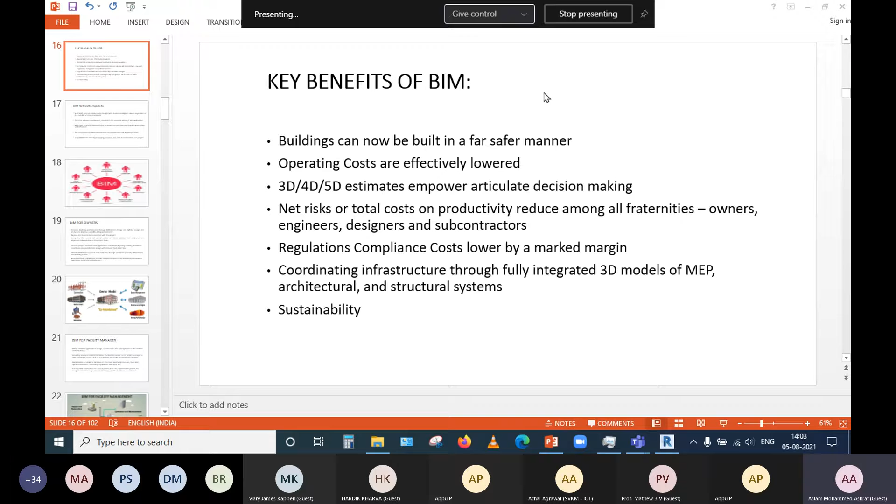So I'll be sharing my screen now. Can you see my screen? Yes, sir. Can you put it in slideshow mode, sir? Yeah, sure. Okay, I hope you can see my screen now.

So our today's topic will be digital construction. And let me introduce myself. I am Engineer Aslam Muhammad Ashraf. I'm a senior technical engineer from BIM Labs Engineering Services, Kochi. And I'm working in this digitization of the construction industry and building information modeling for the last 3 years. And I have project experience of around 7 years, mainly in MEP services, that is project execution and commissioning.

So before going to all these terms, there are a lot of terms here, we need to have an introduction into all these terms. So first of all, we will see why digital construction is relevant. What is digital construction? How can we define digital construction? So we all know that we are living in a world where digitization is having its role in every aspect of our life, like the mobile phones we are using, the computers, and every sector, even the education sector, data, information technology, and even in the financial sector, we are all using digital currencies, digital transactions, especially after this post-COVID scenario.

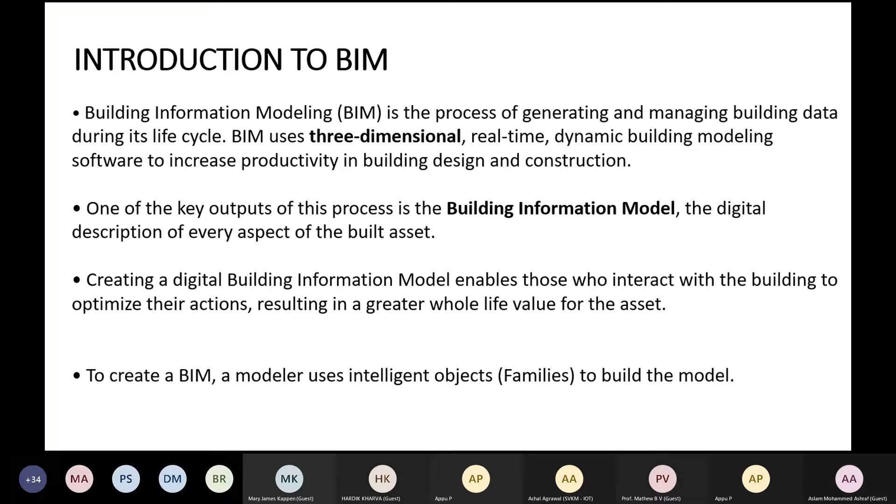The definition of building information modeling as part of ISO 19650, the primary standard defining BIM, is: use of a shared digital representation of a built asset to facilitate design, construction, and operation processes to form a reliable basis for decisions. That is, we are creating a virtual database of our building.

It will have its architectural part, structural part, mechanical, electrical, plumbing, infrastructure; whatever we are going to construct in reality, we will create it virtually using BIM authoring software like Revit, ArchiCAD, etc. Then we will add information. We will enrich the model with geometrical data, non-geometrical data, physical, thermal, heating and cooling loads, climate data, the project planning data; everything can be added as an input into this model.

The US National Building Information Model Standard Project Committee is another body responsible for the implementation of building information modeling in the United States. It defines BIM as a digital representation of physical and functional characteristics of the facility. It is not simply some geometry, not simply some drawing. It will have more than that. The physical and functional characteristics of the building will be added to the model.

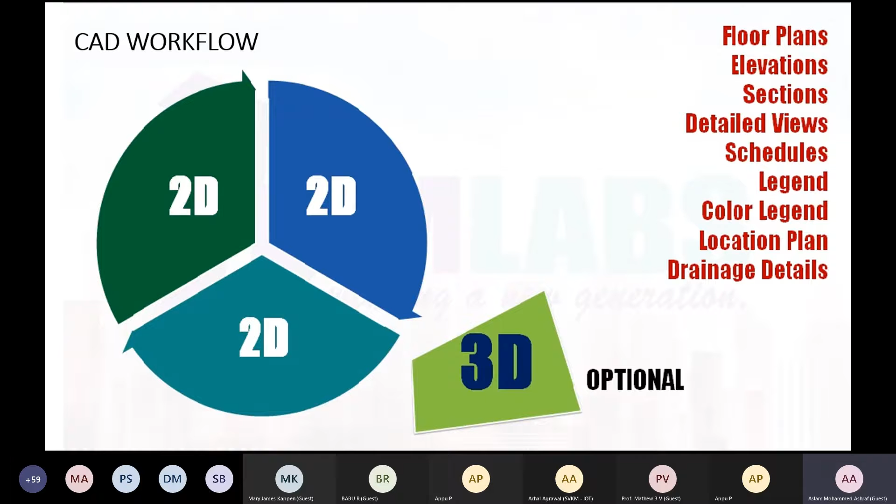But this has many advantages. The CAD-based workflow has many advantages when we compare it to the earlier hand-based drawing. It can save a lot of time because we are using computer-aided software like AutoCAD or ZWCAD or whatever 2D CAD software. But there are a lot of disadvantages caused by the traditional CAD-based workflow.

The first one can be said to be updations and rework, because a small correction in a CAD-based workflow needs a number of updations in different sheets. For example, if you want to change the position of a door or a window in the architectural plan, it should be reflected in the section, the elevation, and whichever views you have created. So every time the draftsman has to make the change in every drawing, and it will take a lot of time and manual work.

Another drawback is coordination and clashes. There is no proper coordination between different disciplines like architectural, structural, mechanical, HVAC, electrical, plumbing. All the contractors will create their own 2D CAD drawings, and when these drawings are brought to the site and they start their installation or construction works, clashes will arise. For example, an HVAC duct going through the same elevation as a structural column or beam, or electrical lighting fixtures allocated in the same place as an AC terminal.

And consider a high-rise building or a very huge project. There will be thousands of clashes, and if you try to clear these clashes on site, it will definitely cause time and cost overruns, and it will eventually result in the project going over budget and a loss. So actually we do not have any solution to find the clashes during the design phase. They can be found only during the execution phase.

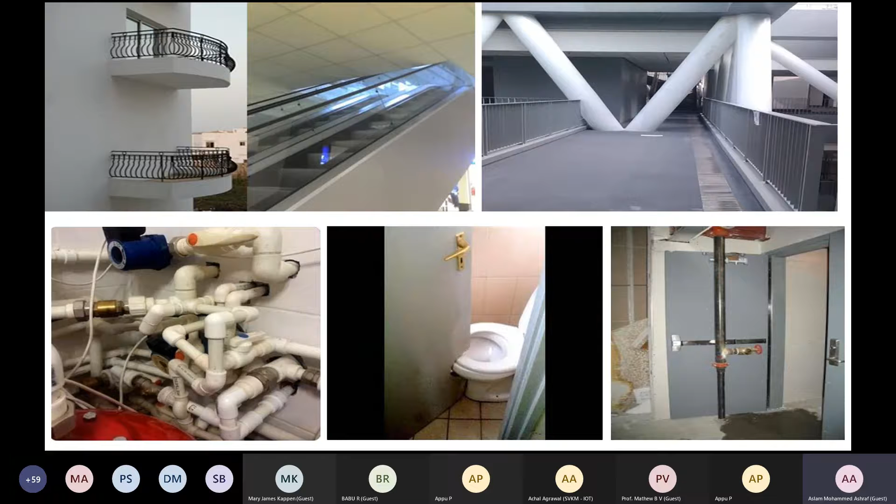So all these drawbacks of CAD prompt the engineering society or the designers to go for alternate methods to streamline the construction process. That's why building information modeling has been introduced. In order to compensate for all these drawbacks of CAD-based workflow, BIM has been introduced. So how can BIM help in reducing all these issues caused by the traditional CAD-based workflow?

The importance of BIM is that it can be extended from the very programming or starting of the project to the operation and maintenance as well as renovation phase of the building. It is not limited to the design phase, it is not limited to the analysis phase. It can be extended to each and every phase of the building construction, the engineering and construction; we can extend it to every phase of the project. Okay.

So there is automatic updation. That is the first benefit. We do not have to update the views separately. If you are making a change in a floor plan view, it will change in the 3D view, section view, elevation view simultaneously.

Then there's another benefit. It is called clash detection. We can find the clashes using dedicated clash detection software like Navisworks. We can create a BIM model, export it into clash detection software, and find if there is any element clashing with another element, like a mechanical element and a structural beam or a column, or some electrical and HVAC elements. If there is a clash, we can find it and clear it during the design phase itself, and we can hand over a zero error model to the site, so that the clashes can be avoided in execution of the project.

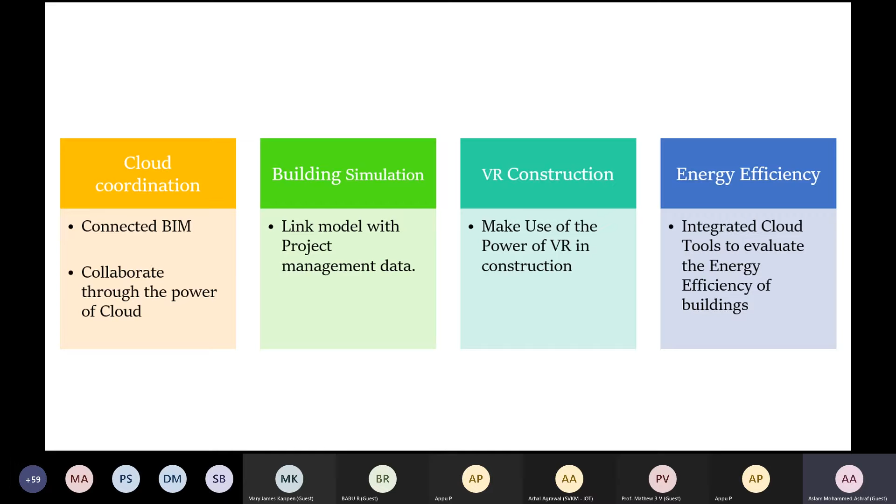So we have explained all these things. The construction can be done in a very safe manner because there is a streamlined process going on. Then operating costs can be effectively lowered because all the planning, all the construction will be virtually done before the real execution of the project. And when we hand over this data to the site, it will be very easy to carry out the process.

Then 3D, 4D, and 5D. That is 3D model, 4D means time, that is a schedule, and 5D is the estimation that can be created from the BIM model. It can be used for decision making. And we can have regulation compliance; the local or international code compliance can be carried out in a very low margin or a very low amount.

Also the sustainability, like the LEED certification, the energy efficiency can be calculated from the 3D model itself using software like Insight, and the sustainability studies can be done before the actual construction of the project itself.

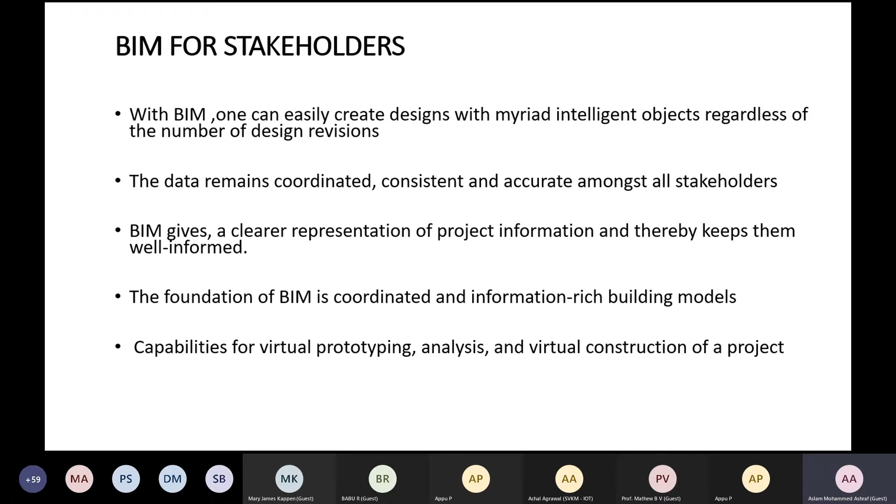So BIM is not just for the designer or the draftsman or the client. It is for the entire stakeholders of the project, that is from owner to the facility manager. Whether it be contractor, architect, structural engineer, mechanical engineer, fabricator, facility manager, or maintenance technician, the BIM model is useful for all of these stakeholders.

So for the case of owners, it can be used for reducing their financial risk associated with the project. It can be used for creating reliable cost estimates and improved collaboration of the project team. And it can be used to assure program compliance through ongoing analysis of the building model against owner and local code requirements. So the local code requirements, the energy efficiency, the BIM-based energy and lighting design, everything can help the owner to reduce the financial risk associated with the project.

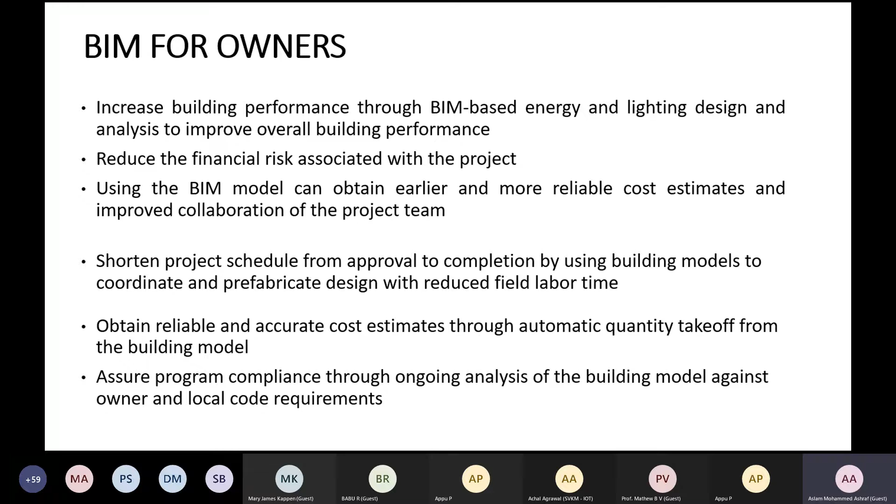Also, an owner model can be set as an as-maintained model or as an as-built model. It will be having the entire data related to the model, like space management, the fabrication details, maintenance management, energy performance. Everything will be there in the as-built or as-maintained owner model. So even after the handover of the project, it can be used for further renovation of the project, further approvals, their demolition. In every phase of the project, it can be used by the owner. And for the future space management, this model can be used.

Also for facility managers, this is a similar use, that is using the model for facility managing and maintenance planning, etc. So it can be used for knowing the details about the service period, manuals, replacement period of the equipment used in the building. For example, you have some furniture that is used in the building, and we will be having the BIM model showing all the procurement details of the furniture, the warranty period, the replacement date, everything will be there, and we can use this BIM model to know exactly the service report of the equipment used in the building, the renovation. The renovation budget, the renovation estimate, everything can be accessed from the model. So it is very useful for facility managers also,

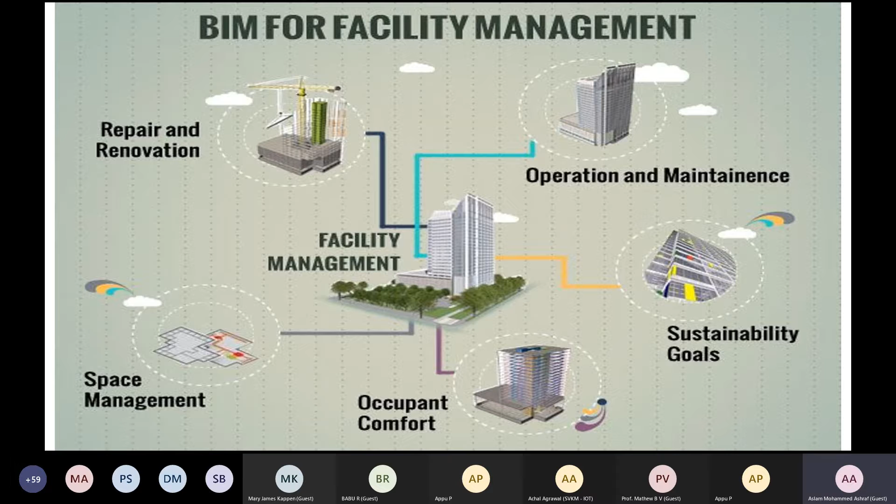and also for the future space management and then setting operation and maintenance. Another important thing is that we will be having the maintenance schedule. It can be uploaded into a BIM model. So the future maintenance can be planned using the BIM model itself. And we do not have to call many persons and confirm whether the maintenance has to be done, what was the previous work done. It can be extracted from the BIM model itself. So it is very useful for facility managers.

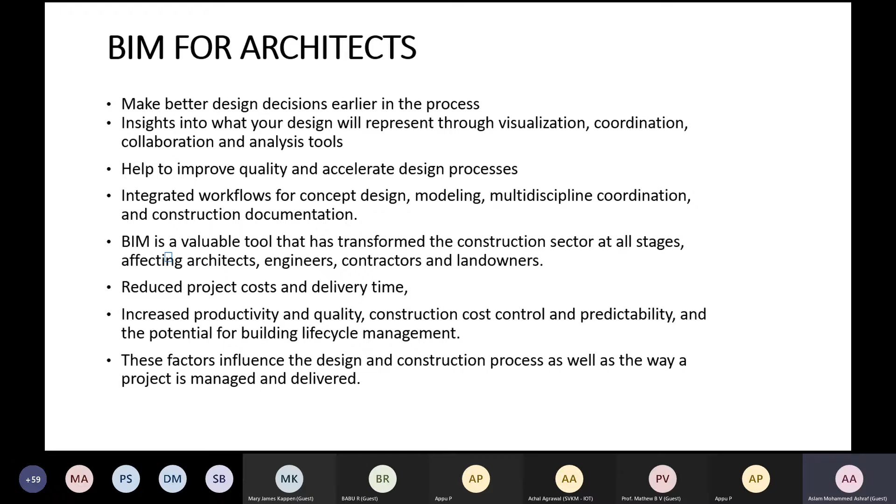Also for government institutions, it is very useful because they can streamline the process, and because of the collaborative nature of building information modeling, it is very useful for government institutions also. They can check whether the model is complying with the local codes, whether the required code requirements are done or not. Everything can be done. Also visualization can be done. And for all the stakeholders like architects, engineers, this can be very useful. There are many points to discuss regarding the usage for architects, structural engineers, mechanical engineers.

So in short, we can say that the entire cost of the construction project, the clashes, can be reduced. Then reworks can be reduced. The turnaround time can be reduced. We can have better accuracy in estimating the cost. So most of the issues can be resolved during the design stage itself. That is the main benefit of a BIM model.

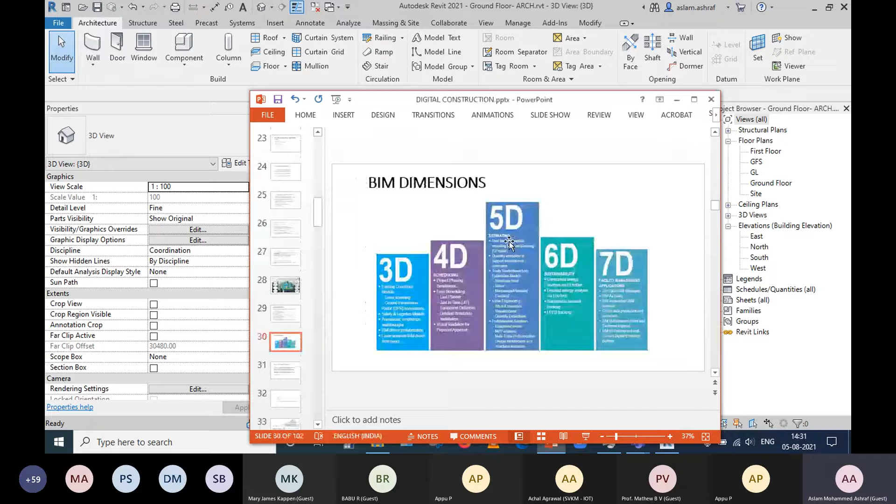So we will see some software interface, then we will go deep into this. Otherwise, it will be difficult to understand what is going on. So what are the different workflows related to BIM? That is another important topic.

So how can we execute BIM, or building information modeling? We need some BIM tools, different softwares like Revit, then FormIt 360, then structural analysis softwares like STAAD and ETABS, then MS Project, Primavera and Navisworks. So we can use all these softwares to create a proper BIM execution plan.

We need to know that BIM, or building information modeling, is not simply a software. It is a process that will be carried out during the entire phase of the building construction, and it is not restricted to a single software like Revit or ArchiCAD. It will start from conceptual design softwares like FormIt or SketchUp, and it can be extended to Revit for detailed design, and we can use the model created in Revit for analysis in platforms like Autodesk Insight, then structural analysis softwares like STAAD and ETABS.

Then we can take the project planning data, the project management data we have created using Primavera or MS Project, and bring it into softwares like Navisworks to create a 4D simulation by linking with the BIM model. Then finally, we can create documents like sections, 3Ds and elevations from BIM authoring softwares like Revit itself. And there are softwares like BIM 360 used for cloud-based collaboration. So we will see the interface of some softwares like Revit and Navisworks and how they can be used to create a BIM model. Then you will have more insight into these workflows.

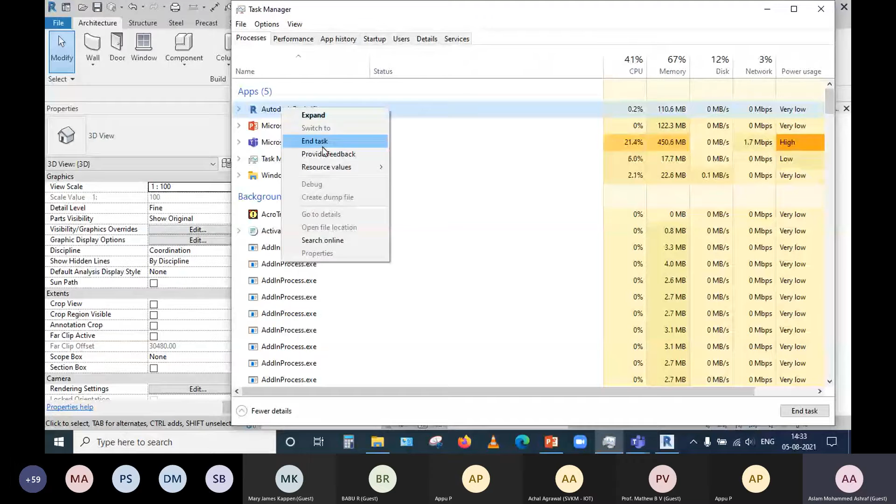So the importance of Revit is that Revit is a BIM authoring tool. We need BIM authoring tools to create a BIM model. Then we need analysis softwares like STAAD, ETABS, then Autodesk Insight for energy analysis, structural analysis, etc. Then we need project management softwares like Primavera or MS Project to create the project management data, and we can link it with the BIM model using softwares like Navisworks. Then for clash detection between different disciplines, we can use the same software, Navisworks. And finally, we can use BIM 360 for project coordination and collaboration using cloud.

Okay, so Revit is a BIM authoring tool, and we can create new projects using Revit. For example, I will show you some models I have created. The importance is that we are not using lines or arcs to create the model. We are using real elements, virtual elements. For example, if you want to draw a wall, there is a tool called wall itself. If you want to place a door, you can use the door family. Everything in Revit is called a family: window, door, roof, mechanical elements, electrical fixtures, lighting fixtures. Everything can be said as a family.

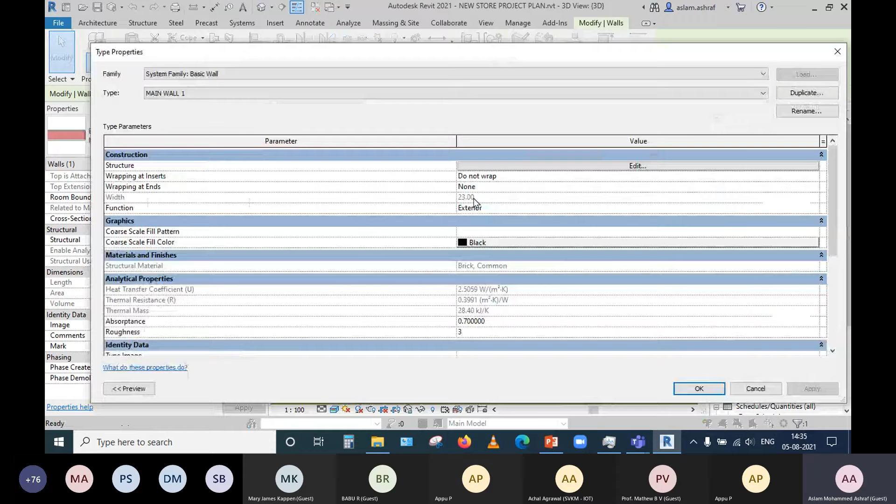For example, you can see the elements drawn in this model. If you select any of these, you can see the properties. It is called wall itself, and you can see the base of the wall, from which level up to which level. Then the height of the wall, the total area, the total volume, everything is added as parameters. That is why it is called building information modeling. It is not simply the model, it is more than that. There is a lot of information. For example, if you go to an option like edit type here, you will see the structure of this wall. You can have a preview.

And it will show the different layers of the wall. For example, the center is a 20 centimeter brick, and the plastering can be added as concrete plastering on both sides with the thickness mentioned. And if you go deep into the material, you will have the thermal properties, the R values, U values, everything of the material, and it can be used for energy analysis studies.

For example, if you want to know the thermal properties of the brick, they are added here, like the thermal conductivity, specific heat, density, emissivity, permeability. So you can use materials with better U and R values for energy efficient building construction. So that is one advantage. And you can even change the material. For example, if you want to change it into a concrete retaining wall, you can simply change the material here to concrete.

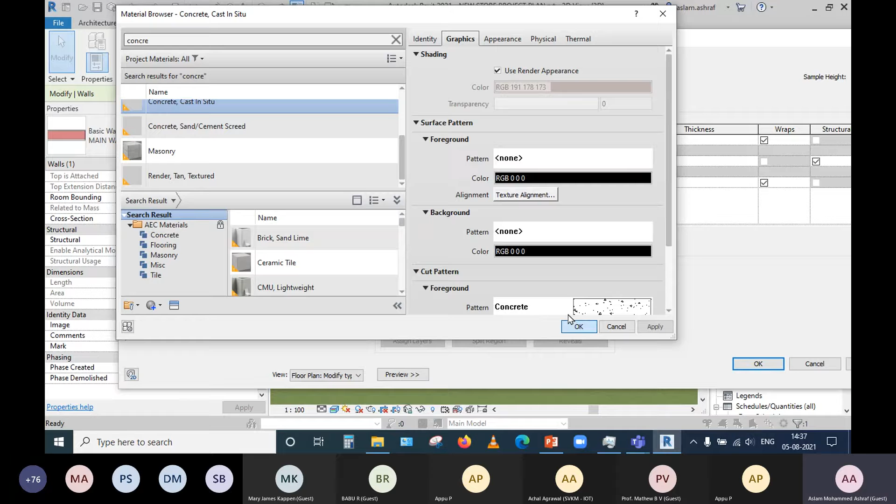So it has a dedicated library, the Autodesk material library, and it has a lot of materials that we are normally using in our projects. So if you are changing the material, the texture, everything will be replaced. So the material appearance, everything will be changed according to that. Even you can add paints, you can remove the paints from this. So the material texture will be seen in a rendered manner.

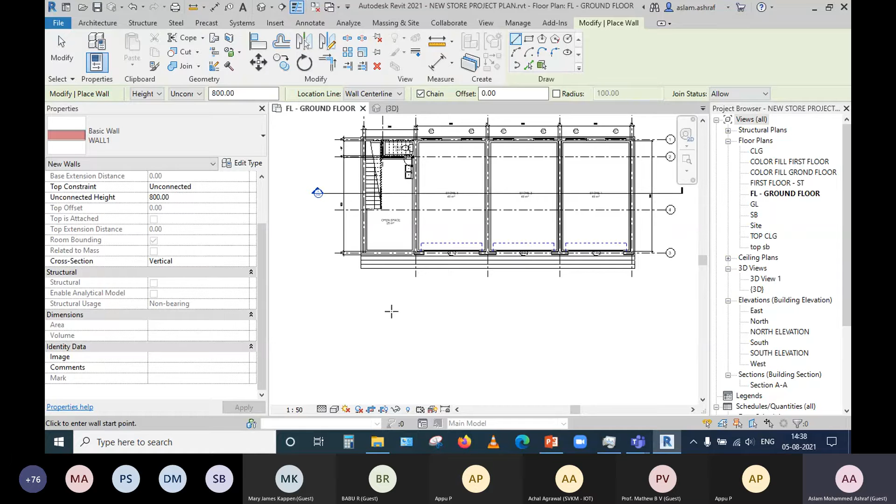So in order to draw some element, you do not have to draw some kind of lines. If you want to draw a wall, you can simply use a wall tool and simply draw the element. And that wall will be drawn. And the main benefit is that that change will be reflected in every view.

For example, if you are making a change in this floor plan, a top view or floor plan view, and you delete some element from here, for example these steps, I'm going to delete this, and that change will be simultaneously reflected in the 3D view. And if you go to the elevation views, that change will be reflected. For example, I'm going to delete the roof or a wall from this elevation view. That change will be reflected in the 3D, even in 2D view. So reworks and updations are not required, like in AutoCAD.

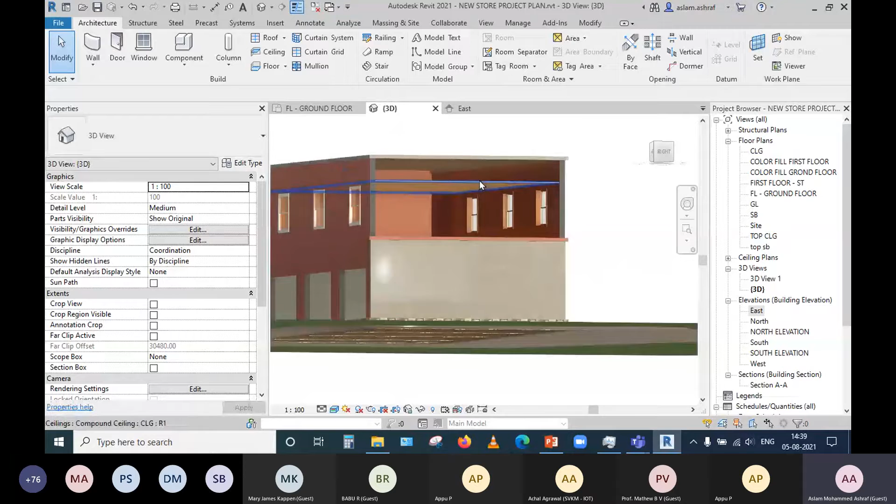And everything is an intelligent object, called a family. You can select the window or door or whatever, and it will be shown as that exact equipment itself. It's called a window, and the material used, the thickness, the width, the height, everything will be added as parameters. Even the frame material, the trim material, panel material, everything is listed, and when you replace it here, that change will be added into the model also. And you can create your own custom equipment, custom windows, custom doors, furniture, etc.

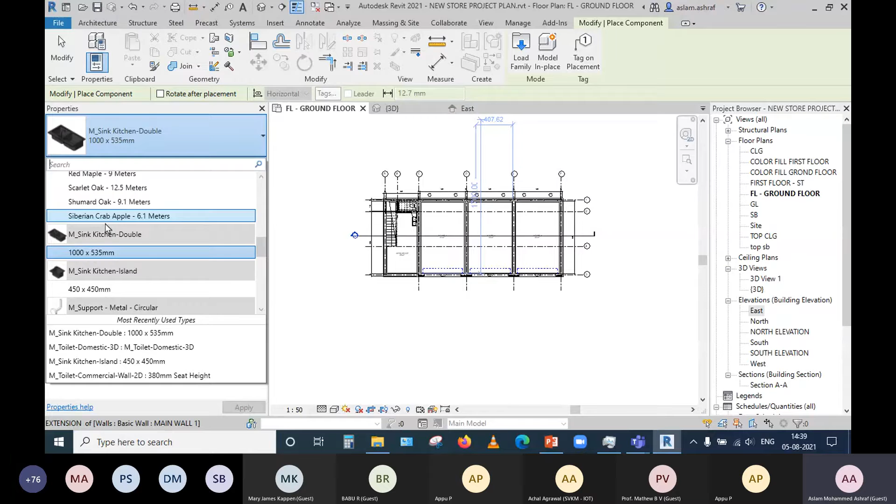And you can load a lot of elements from this interface itself, like furniture, kitchen equipment. So whatever elements we are using in a normal project can be virtually added from the libraries. And if that is not available, you can create it using your own family creation tools in Revit itself. You can see here the library lists almost everything.

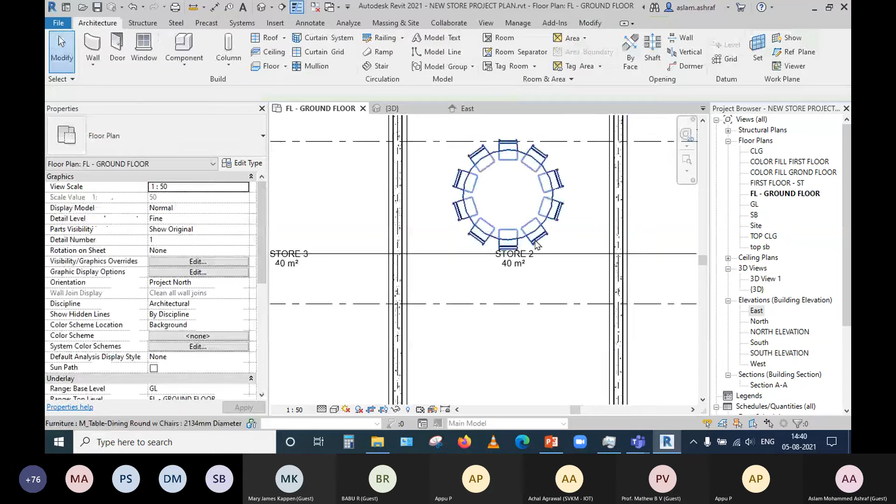So I'm adding one furniture here. And you can see that this is a separate family, and even the number of chairs can be changed. And that change will be reflected in every view. You can see the changes there in every view. So you need not draw all the sections and elevations separately. You simply place the element, and that change will be reflected everywhere.

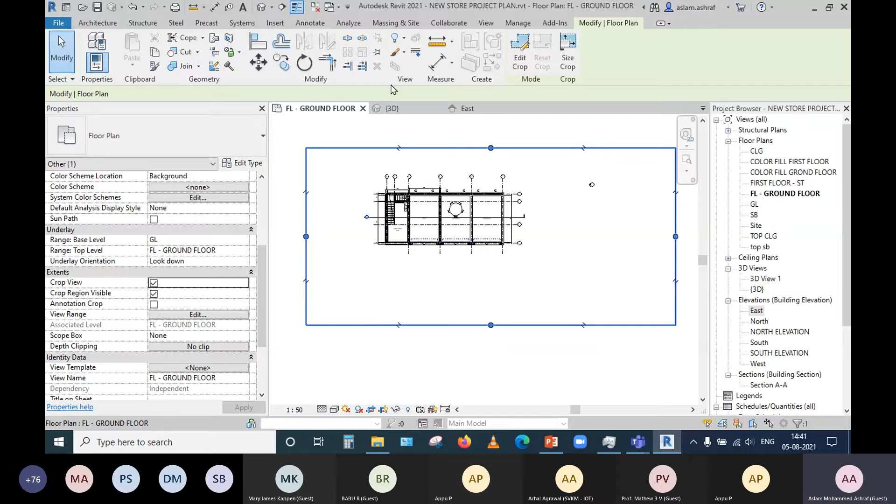So similarly, you can place the landscaping elements, the structural columns, beams, everything using these Revit tools. Like if you want to place some site components like trees, you can load it from here. And that change will be reflected in every view, even in sections and elevations. So the need for rework is completely avoided if you are using BIM based workflows.

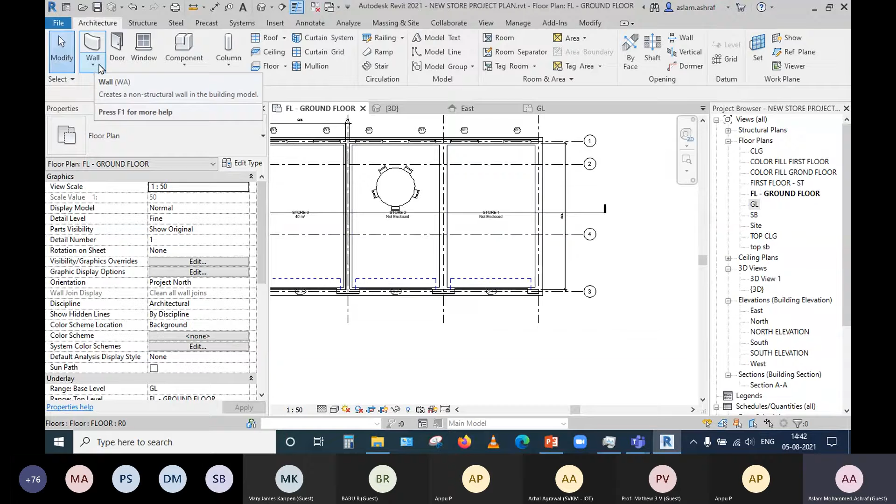And another important function is that we can create our own custom elements. Like we showed with the wall, we can even create doors, windows, columns, roofs, etc. according to our requirement. You can create sloped roofs, curved roofs, everything using these elements itself.

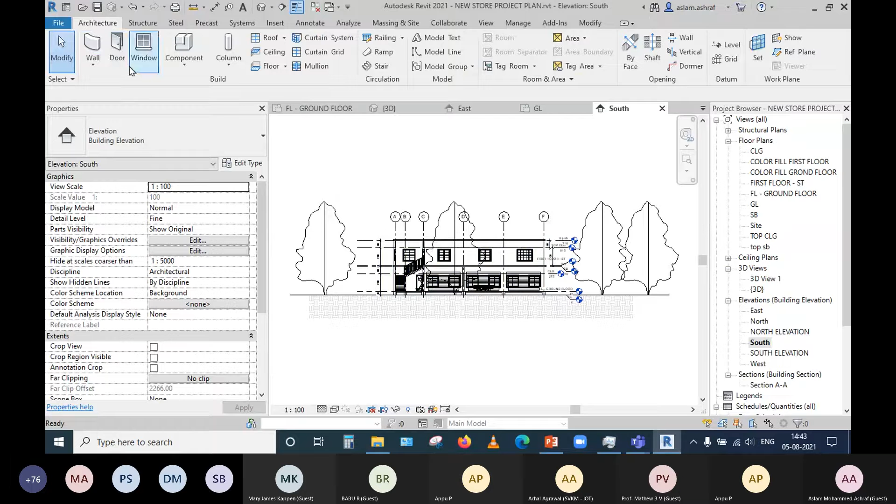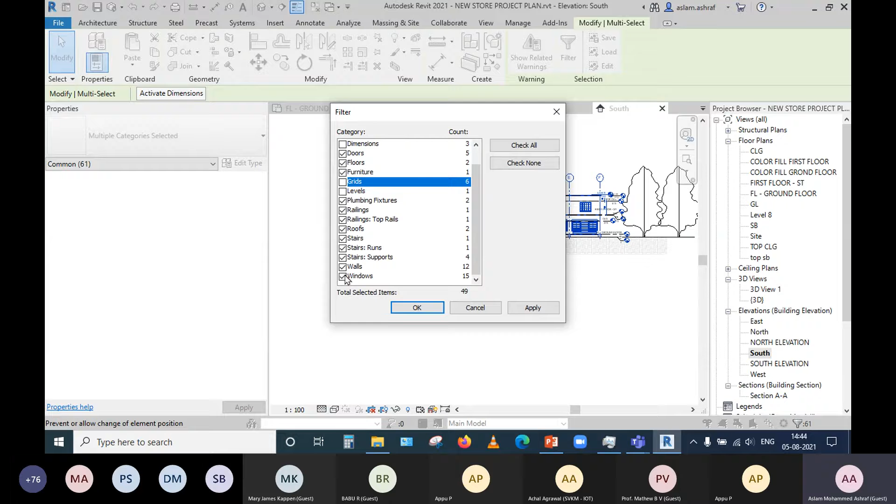And it is very easy to copy elements for creating multi-stories. For example, if you want to repeat these elements through multiple levels, it is a very easy job, unlike in CAD. You can simply copy the elements and paste them into other levels. Or you can simply copy, I'll show you.

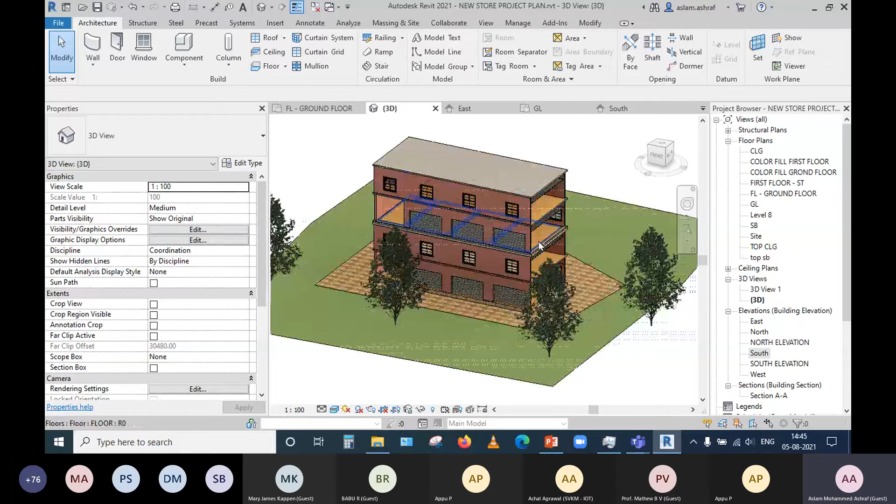So it can be copied directly to different levels, and you can create a multi-story building. Typical levels can be created very easily. So it will not take much time, and its 2D views, its sections, elevations will be readily created. So these are some functions of Revit.

And another important thing is automated estimation. That is, 5D estimation can be created automatically from the model itself. For example, if you want to create an estimate of all the equipment used in this building, normally you will be counting using some kind of Excel sheets, or manually from the CAD file, etc. It will be a very time consuming process, and it will be prone to human error also. So that can be avoided using automated estimation workflows in Revit.

For example, if you want to create an estimate of all the elements, all the doors used in this building, you can simply go to a tool called schedules and quantities. And here you can set which element you want to have the estimate. If it is door, you can set it as door, then click, then set the name of the door, the

manufacturer details. These are all parameters available for the door, like family, then the manufacturer details, then which level it is placed, then the model number, if it is available, it will be shown, then even the thermal properties, then width, height, everything can be listed. Finally, the count, even the cost.

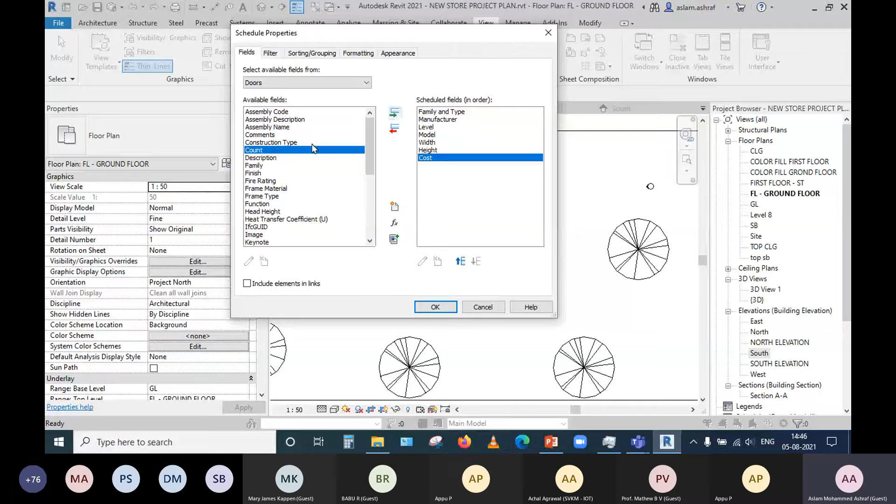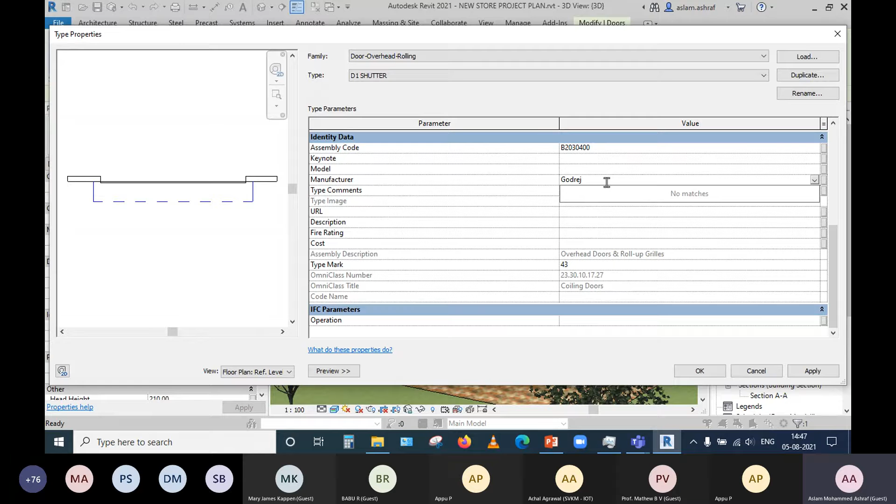You can see the manufacturer details here, like for example, Godrej or something related to it. And that change will be readily affected in the schedule, in all the instances where we are using the same, that will be reflected. Similarly, if you want to know the total cost, you can set the cost for each equipment and the total cost can be found out.

You can sort by different parameters like manufacturer, etc. Okay, and if you know the rate of one of the elements, you can have the total. So you do not have to count manually. You just have to show which category you want to have the estimate, that will be listed here.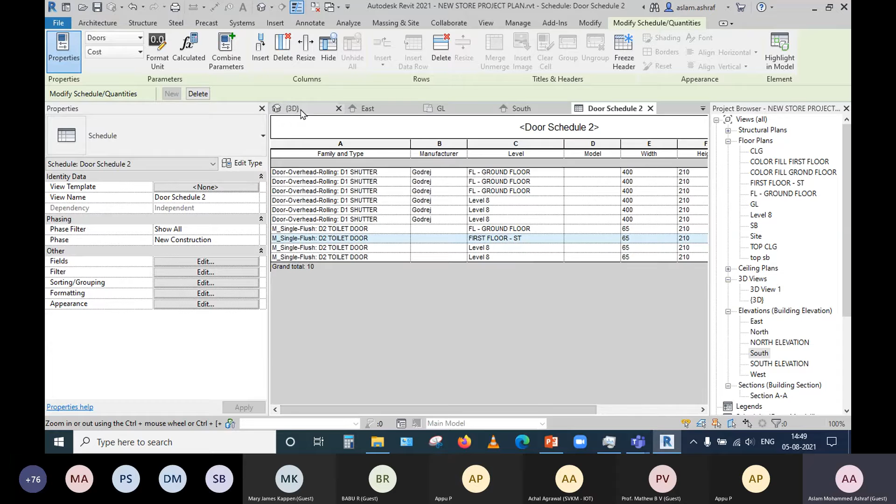And it can be easily exported to Excel sheet also, using export options and all. Can be easily exported to Excel format. Similarly, you can have the details of the materials used, like cement, sand, the concrete, everything can be estimated from the model itself.

For example, if you want to have the total estimate of the material, the wall material details, you can have it like this. It is all created automatically. The material description, material area, volume, number of bricks can be calculated using equations. You just have to provide the value of the volume of a single brick or 1 cubic meter of the material. That will give you the total amount required for the specified material.

So it can be created in a matter of minutes. But if you are going to calculate this from an AutoCAD file, we need to measure the length, the width, everything, and we need to find out everything manually. But in the case of Revit, it can be carried out by using automated estimation. So that is a very huge advantage for those who are doing estimations. So this is another benefit of building information modeling.

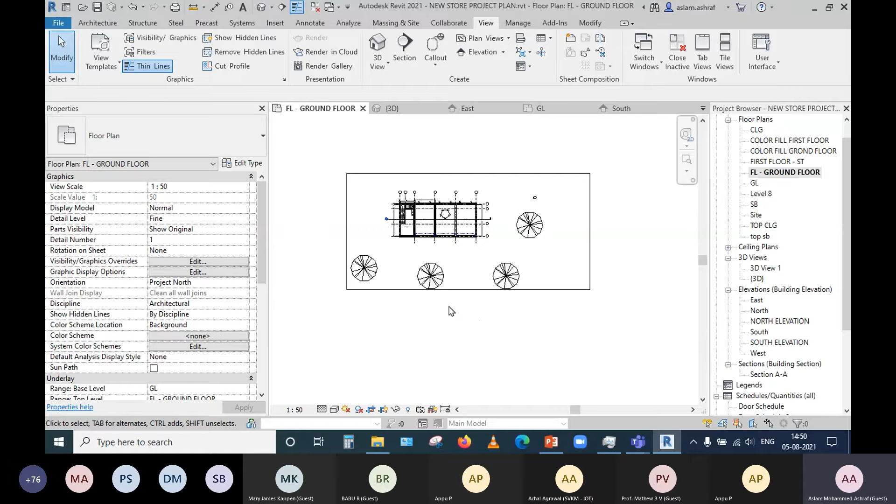And you can create different visualizations like rendering, etc. It needs some high configuration computers. Otherwise, it will take a lot of time to create useful renderings of the buildings. Otherwise, you can use cloud-based rendering platforms like Autodesk Render in Cloud. Similarly, you can create structural models. For example, you can have the structural model of the same building. I'll show you.

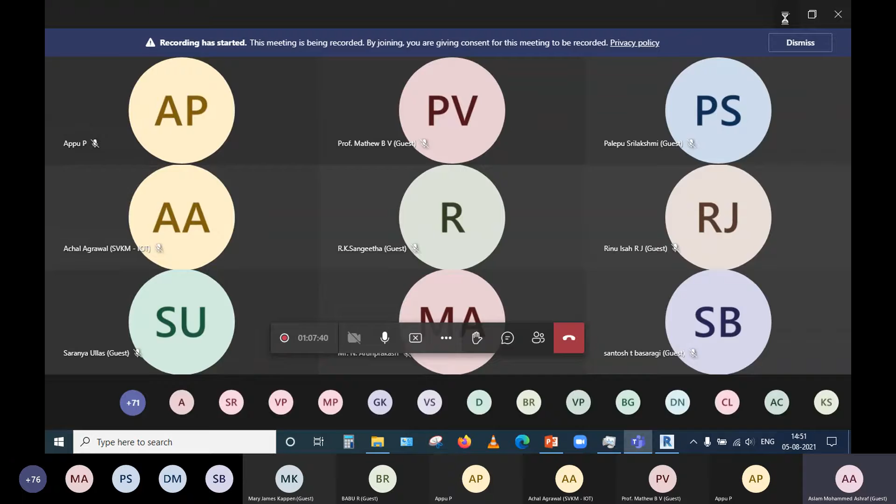So you can create the structural model similarly using Revit tools like column, beam, then the foundation, structural foundations, piles, everything can be created using the structural tools here. Even the rebar details can be added. And the best thing is that you can link together all of these models, the structural, the architectural, etc.

So if you want to draw a column, it is a very simple process. You can go to the corresponding plan view. You can select the type of column you want to draw. Then you can set the height up to which level it has to be drawn. And simply place it here. And you can see that that specific column will be added.

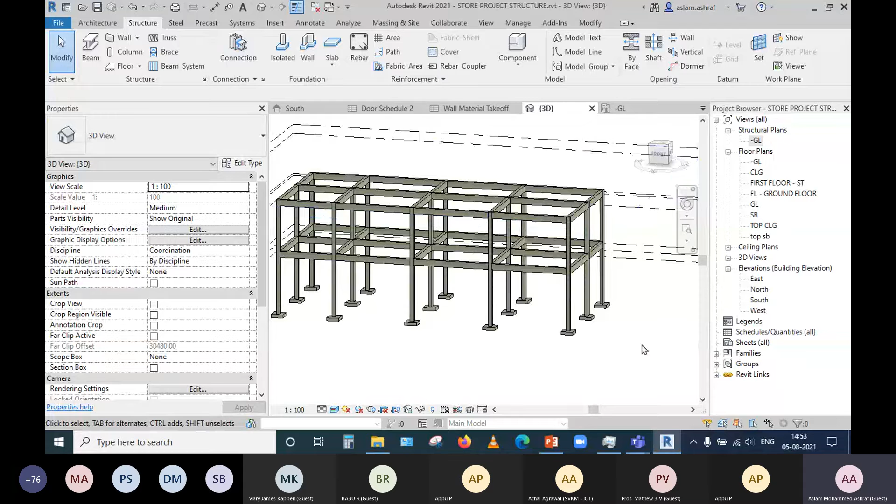You just have to choose the tool, set the upper and lower limits, and place it, and it will be drawn. And you can connect the beams similarly. Similarly, isolated footings, the rebars can be added. Everything related to structural elements can be placed using these tools and the process is similar, and you can have the estimate of all these things also. You can create the estimates of columns and beams based on the volumes, and you can create them from the schedules option.

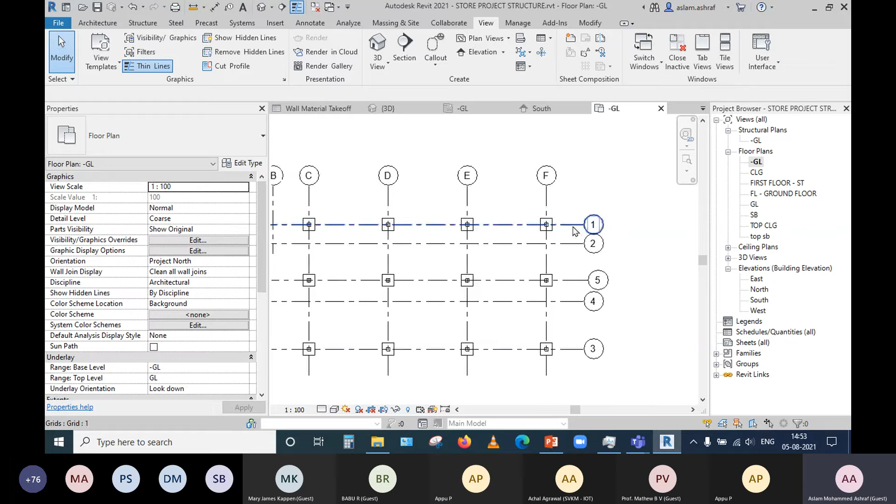And whenever you are making a change, that will be reflected in every view. So you can have the elevations, the top views, even the plan views, drawn from a single 3D model itself. And you can export this to AutoCAD or PDF or whatever format you want to present it to your site. That is also possible. You can export it into different formats.

Even to CAD format, it can be exported, and you can print in any paper size like A1 to A0 to A4. In any paper size, you can print it. That is also possible. Similar is the case with MEP models like HVAC, electrical, plumbing, and all.

So this is the MEP model for the same file you are using, the same architecture file. Similarly, you can create electrical documents of the same project, and you can club them together to form a coordinated model. And that is done normally using the software called Navisworks for coordination and for clash detection and all. And you can find the clash if there is any clash between different elements.

That is another important as well as interesting workflow to bring together all these files, that is architectural, structural, mechanical, electrical, plumbing, and check the clashes between different elements and create the 4D simulations and all. So I'll show you that workflow also. So for that purpose, we'll be using a software called Navisworks Manage, and I'll be using the 2021 version.

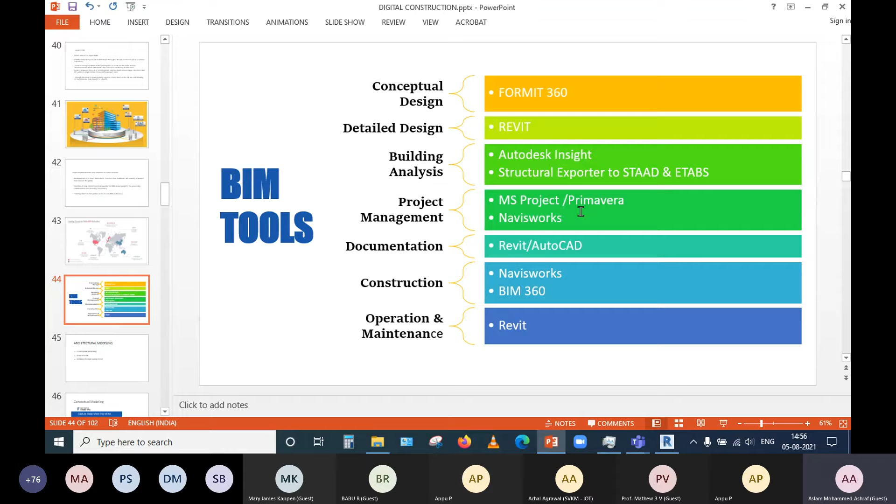So it can be used for clash detection purposes as well as 4D simulation, that is bringing together the 3D model and the project management data. So you can create 4D simulations of how the project will be proceeding. You can visualize the progress of the project.

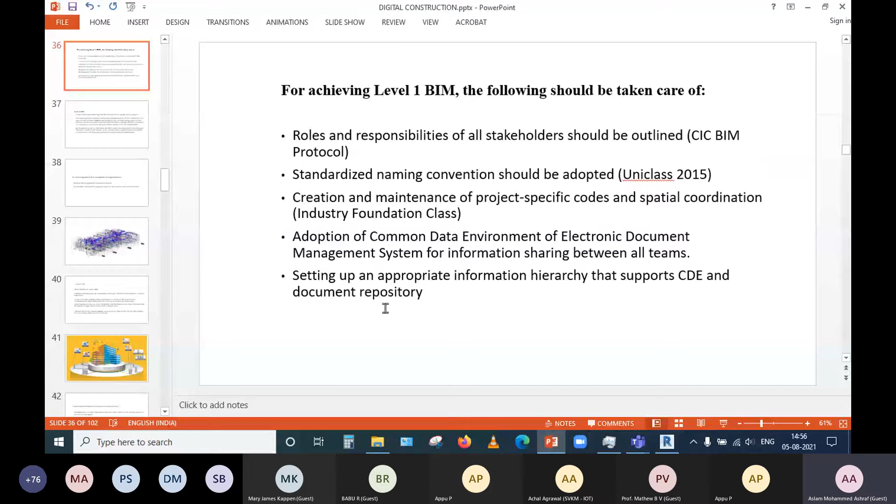So meanwhile, I will show you some more details about BIM. BIM is not limited to 3D modeling and 4D estimation. There are different dimensions in building information modeling, starting from 3D, and it is now extended up to 7D. 3D is simply creating a 3D representation of the building using software like Revit, and it will have its geometrical as well as non-geometrical data like volume, area, etc.

And then the next one is scheduling. That is called 4D BIM, scheduling of the project, getting the time factor into the 3D model. We can use any project management software to create the schedule, and we can bring the project management data and 3D model together using software like Navisworks. Then 5D, we have seen how to get the estimation from the BIM model itself, and we can have the estimate for each and every component that we are using in the project.

Another dimension is called 6D or the sixth dimension, that is sustainability. We can have energy analysis, how much energy will be used by the building annually if you build using the materials provided in the BIM model. And we can check whether it is satisfying the LEED certification conditions and all. If it is not satisfying, we can replace the materials with better energy efficiency values, run the report again, and energy optimize the building in order to contribute to a carbon neutral environment.

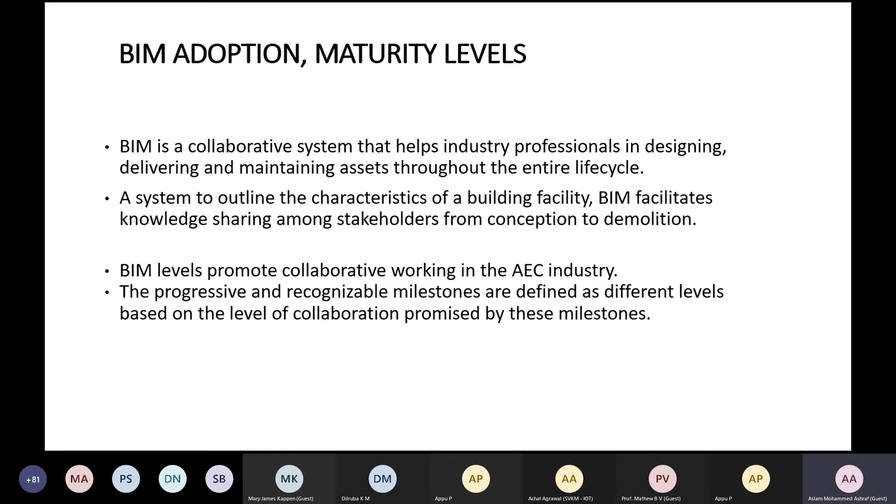So it starts from level 0 and it extends up to level 3 BIM. So what is level 0 and what is level 3? That is also important. Actually, level 0 can be said to be the initial 2D CAD based documentation, the normal CAD based workflow. It is called level 0 BIM. We will be providing PDFs and drawings based on AutoCAD drawings and all.

It is an obsolete level that is rarely used by industry professionals in developed countries, but in our country and most developing countries, it is the most widely used even now. That is why we need more digitization in our industry. We are all familiar with these kinds of 2D representation by drafting or by software like AutoCAD.

And level 1 will be the combination of 3D CAD and 2D drafting. We will be using some kind of 3D for representation, like 3ds Max or SketchUp for rendering purposes, for client presentation and all.

And there will be a common data environment that is managed by the contractor. It will be electronically stored in a computer or a server, and it will be shared only between the contractor and the client, and a little bit to some other stakeholders. And the level of collaboration between different stakeholders is very less when we are implementing level 1.

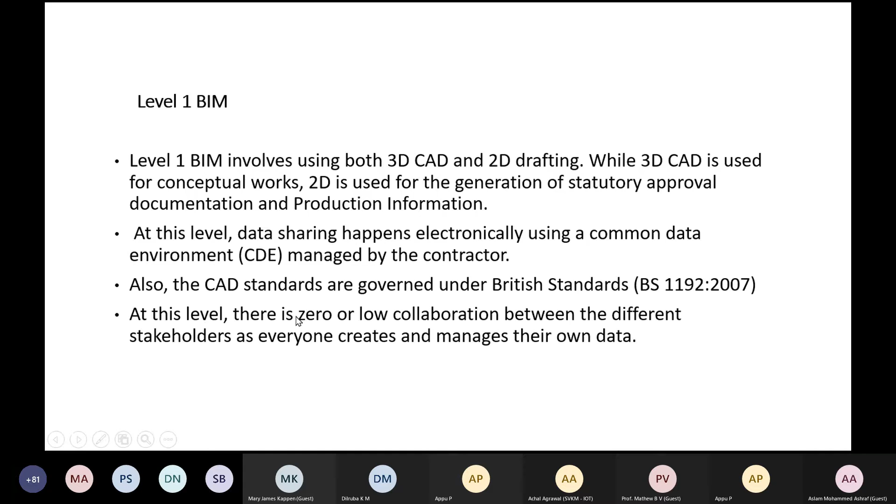So, in order to satisfy level 1, there are some conditions: roles and responsibilities of all stakeholders should be outlined. Then a standardized naming convention should be adopted. Creation and maintenance of project-specific codes and spatial coordination, that is IFC files, Industry Foundation Class. Then there should be a common data environment for storing the data.

So these are the standards governing level 1 BIM. Level 2 BIM is prescribed by the UK government for their public sector projects, and it will promote collaborative working. That is, there will be a collaborative environment. Every stakeholder will have access to the 3D model. Collaborative working is a distinguishing aspect of this level, and level 2 requires streamlined information exchange related to a project and seamless coordination between all the systems and the stakeholders.

There will be a proper protocol for how to share the data between different stakeholders, and there is more collaboration than level 1. So there will be easy flow of data between different team members. That is the main advantage of level 2 BIM, and it is recommended for all public sector projects by the UK government nowadays.

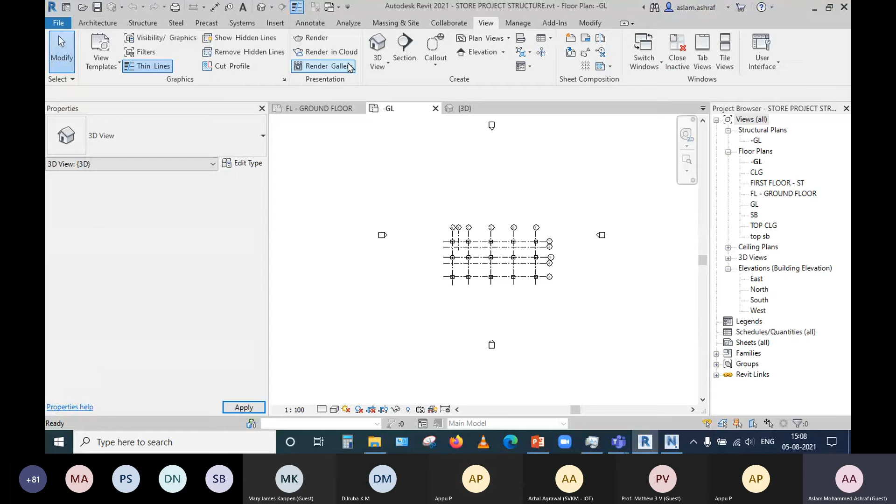So I have already exported these files, the architectural, structural, as well as the MEP file as an NWC file, that is a Navisworks file. So I can open it in Navisworks directly. So this is the architectural file. And you can even have the rendering properties in this. The materials, like we saw in Revit, can be seen here also.

Then we can bring the structural and MEP files using a tool called Append. So this is now a federated model or a coordinated model. You can see this is called a selection tree, and you can select and hide elements if you want to. So you can see that all the things have been brought together, the HVAC, the pipelines, the structural columns and beams, everything has been brought into this interface.

And I'll first show you how to do the clash checking. So clash detection is a very important tool. If you want to know if any element is clashing with different elements, you can run clash detection.

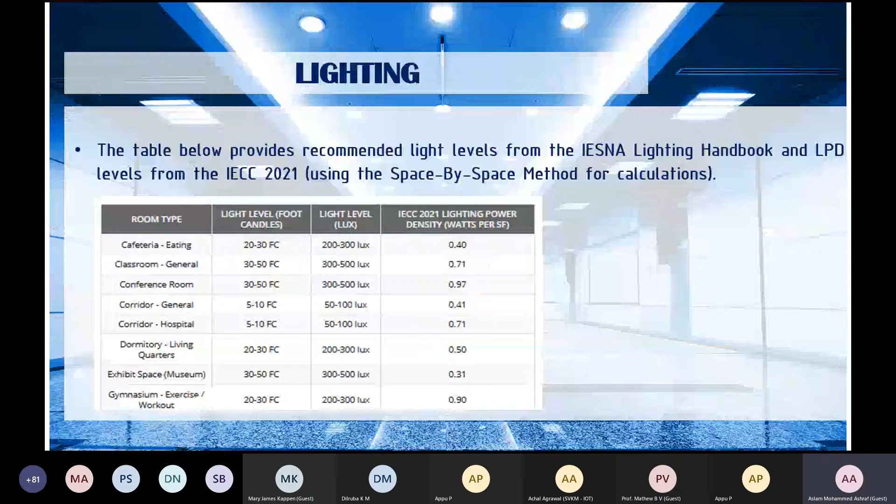Clashes arise as the models of various disciplines, architectural, structural, mechanical, electrical, plumbing, firefighting, etc. are combined to make a composite model, or a federated model, or a combined model. Different names are used, coordinated model. So when we bring together different models, clashes can arise. If we can find the clash and clear it during the design phase itself, we can avoid the need for rework, and that will eventually reflect in budget reductions.

So there are different clashes like hard clash, clearance clash, duplicate clash, etc. A hard clash simply means some element is touching another element. There will be a tolerance value, for example, 1 centimeter tolerance or 5 mm tolerance. If it is clashing by only 5 mm, that will be neglected and will not be considered a clash. But if you set the tolerance value as 0, it will be considered a clash even if it is touching by 1 millimeter.

Then there is clearance clash. If you want to have clearance between different elements, for example between a pipe and a wall, the clearance should be like 10 centimeters. So you will set the tolerance as 10 centimeters. And if you run the clash test with the clearance clash condition, and the space is only 5 centimeters, it will be highlighted in the model. So you can remove that clash and increase the distance to satisfy the condition, that is 10 centimeter clearance.

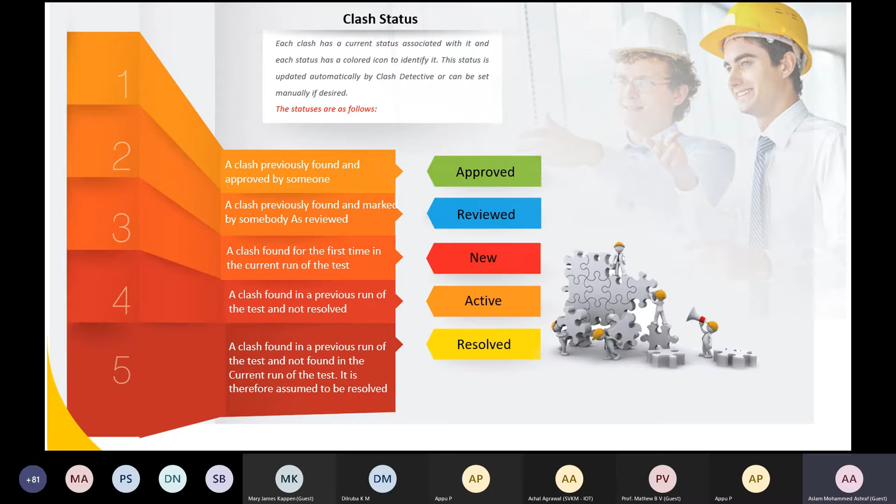Okay, so I will show you how to find the clash using Navisworks. So in order to do that, first of all, you need to have a federated model combining all the building parts, architectural, structural, MEP, etc. Then there is a tool called Clash Detective here, and you can specify between which element you want to find the clash.

Before that, you have to define a test, that is add test. For example, I want to find the clash between structural file and HVAC elements, AC components. So I will define a clash here. Then from the available files, first of all, I will select the structural part. So all the columns, beams, etc. will be selected.

Then from selection B, this is selection A and this is selection B. From selection B, I will be selecting only the AC part, that is HVAC part. So air terminal, duct fittings, duct, mechanical equipment, all these denote the AC parts, HVAC parts. Then from first floor, I will select the same. So all the AC related elements have been selected.

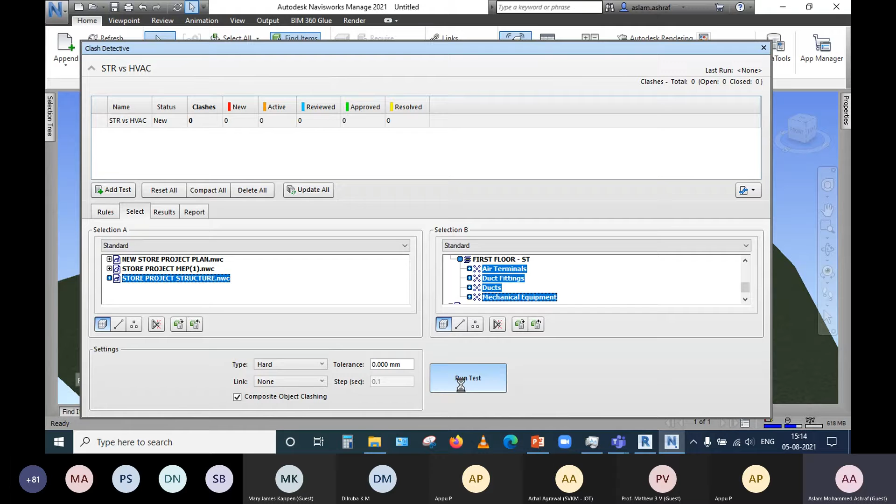And the clearance, the tolerance value, I am going to set it as 0, and I need to know the hard clash, whether the elements are touching each other. So if the HVAC duct is passing through some column or beam, it should be rerouted. Otherwise, it will be creating a lot of issues inside. So then if I click on run test, if there is any clash between this, it will highlight here.

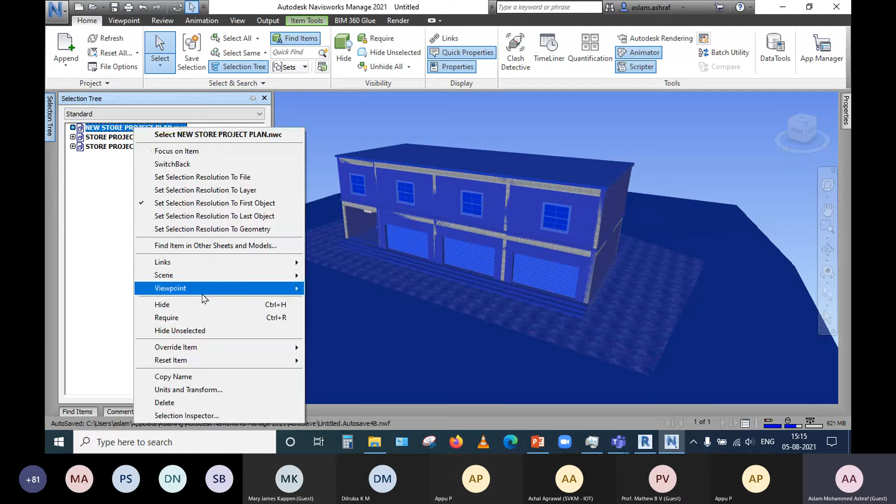Okay, it is showing that there is no clash between the structural columns and beams and HVAC elements. So you can check it in the model if it is true or not. You can simply hide the architectural plan and check. You can see that the HVAC element is not touching any column or beam, so that is obviously true. A small gap between every beam and HVAC part. So that is why it is not shown as a clash.

Then we can check between the MEP elements itself, like the duct and pipes. There are pipes going on here. So we can check between pipes and duct. So again, I will go to Clash Detective, run another test, then rename it as plumbing versus HVAC. And from the left side, I will select the plumbing elements like pipes, etc. And the right side, I will select the AC elements.

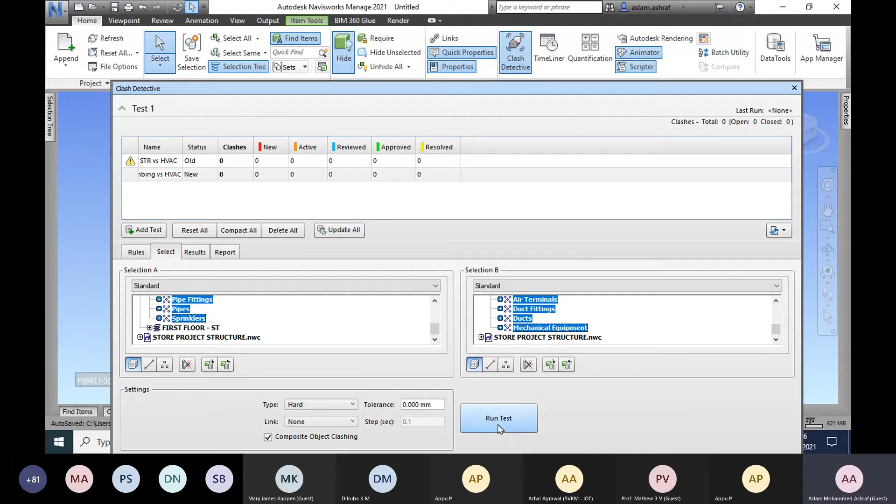So if I click on run test, it is now showing that there are 6 new clashes between these two elements. And if you zoom, you can see that this pipe is going through this duct. Similarly, if the duct is touching a structural column, it will be highlighted if it is there.

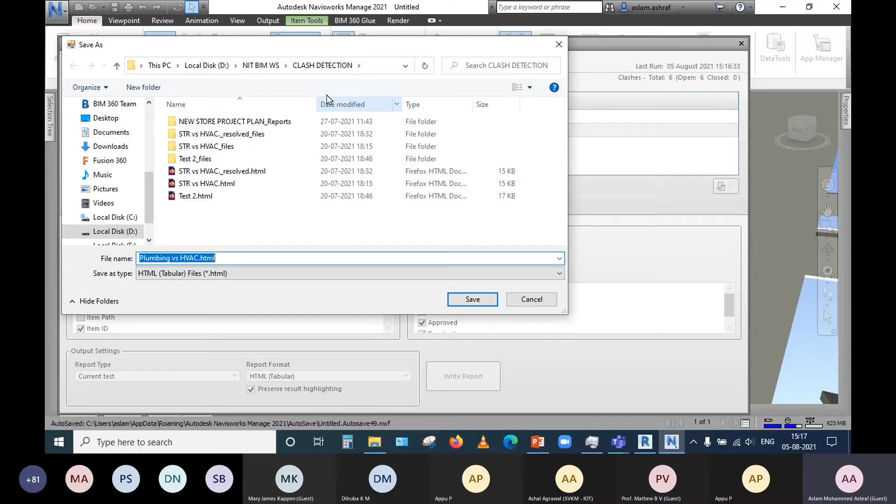And you can create a clash report showing all these things, by going to report, then write report. That will be HTML format. We can even have Excel format or many options. And if you go to that specific option and open that report, it will highlight all the clashes with the images. You can directly go to the image and see where the clash is arising.

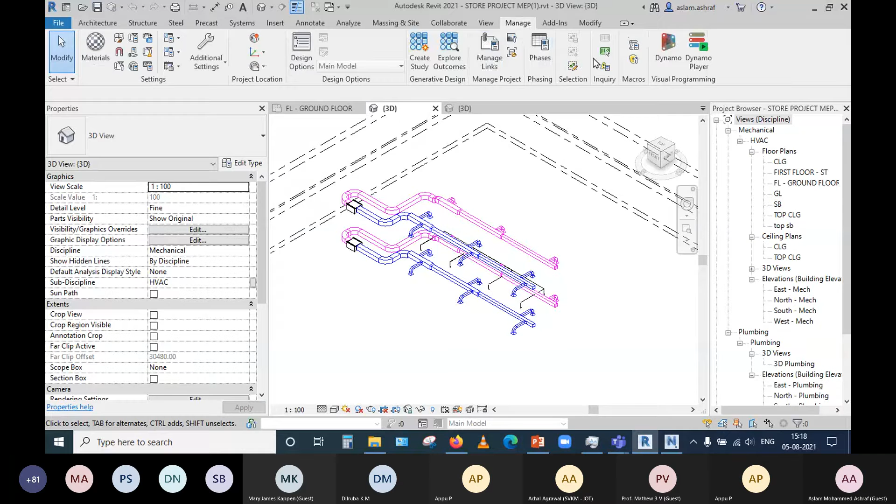Okay, and how you will clear these clashes, that is an important factor. So you can either change the height of pipe or you can reroute the duct. So here you can find different options like element IDs. You can select this element ID, for example, I'm selecting the element ID of the pipe, that is item 1 here. And I will copy this. Then in Revit there is an option to find the element based on element ID. And that specific element will be highlighted. You can see here.

And you can either delete or reroute these pipes using Revit tools. And then if you run the clash test, that clash will be removed. The number of clashes will be 5 only after removing that specific clash, if you rerun the test; there's an option to rerun the test here. Similarly, you will clear all these clashes separately. And finally, a zero clash model will be handed over to the site. So that is the form of clash detection and resolving.

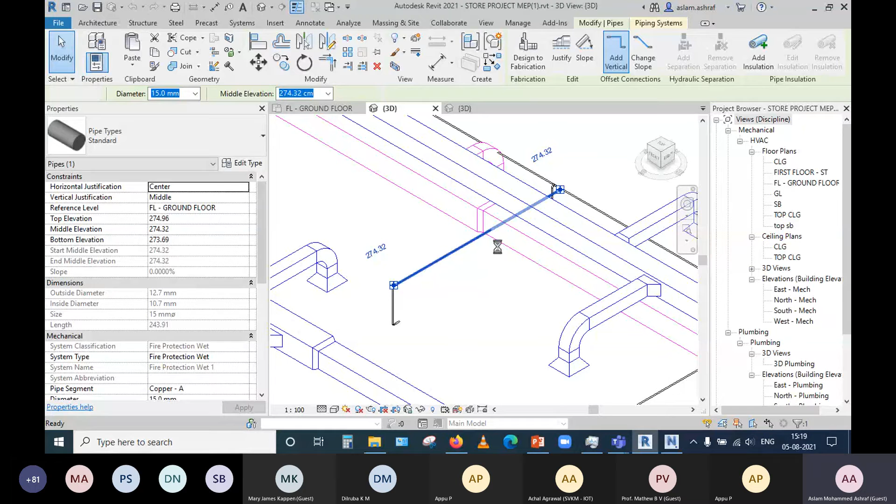And you can create some kind of resolved clash report. After clearing all the clashes, the status will be resolved here. So I will show you one example. I'm just deleting this in order to remove the clash. Not going to reroute, just for the time. I'm deleting these two pipes so that the clash is removed. In reality, it is not possible. You have to reroute the pipe in order to avoid the clash, like taking it above or below this.

Similar in the case of structural elements. We cannot change the structural design easily. But these are all metallic or PVC elements. So the MEP elements can be rerouted more easily than the structural part. So mainly the changes will be carried out by mechanical or piping designers. The structural part is seldom changed. Okay, I will save this.

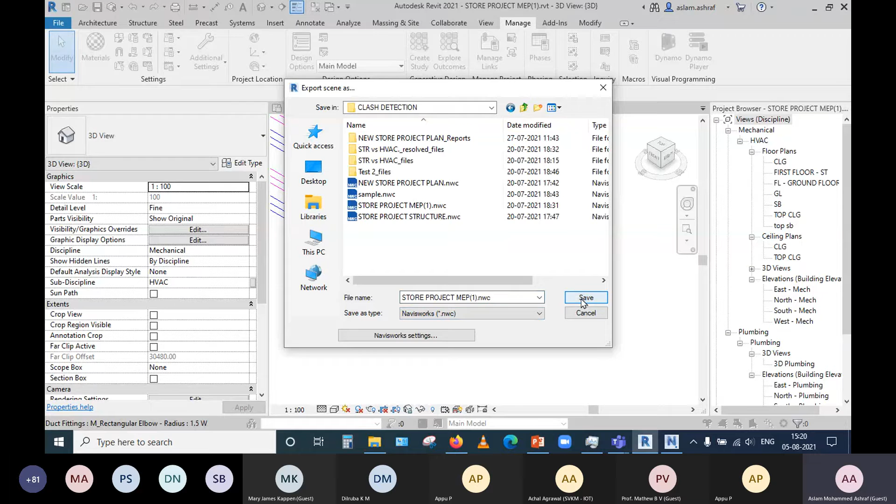And after making the change, I will again export this file into a Navisworks format. That is the workflow. After making the change, it will be again exported into Navisworks, and the existing file will be replaced.

Then we will again reopen the same Navisworks file, the Clash Detective. And if you rerun the test, you can see that 3 clashes have been resolved. Because of some changes, a new clash is created, but 3 clashes have been resolved. So now you have to remove the other 4 clashes. Similarly, you will clear all the clashes and a zero clash report will be handed over to the coordinator. That is the workflow.

So it will be very easy to construct with a zero clash model. If you are handing over this document to the site, there will be no clashes. There will be minimum clashes arising on site.

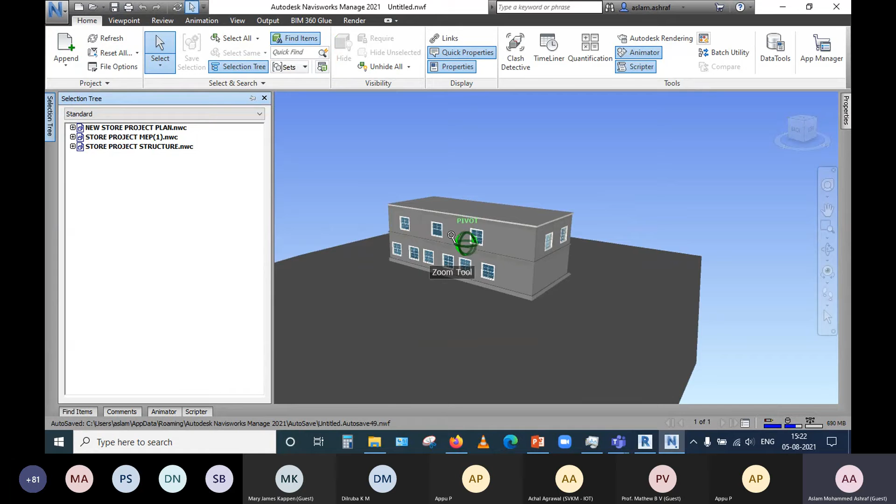And the other important thing is called 4D simulation. That is linking the BIM model with data from project management software like Primavera or MS Project. That is called the TimeLiner tool in Navisworks.

Here you can even add your tasks like task 1, task 2, etc. For example, the project will start with the foundation, then the columns, beams, floors, then walls, windows, doors, and it will progress like that. Then interior works, MEP services, then finally landscaping. That is how the task will progress normally.

So you can add different tasks here, or you can bring them from third-party software like Primavera or MS Project. Or you can bring them through a CSV option, that is a kind of Excel file. So there are many options. Or you can manually add them here. I will show you a basic example like structural foundation, a time-based progression, how the project will be scheduled.

Then there should be a floor in between. So I will add another task here. Then walls, and you will create a schedule based on this.

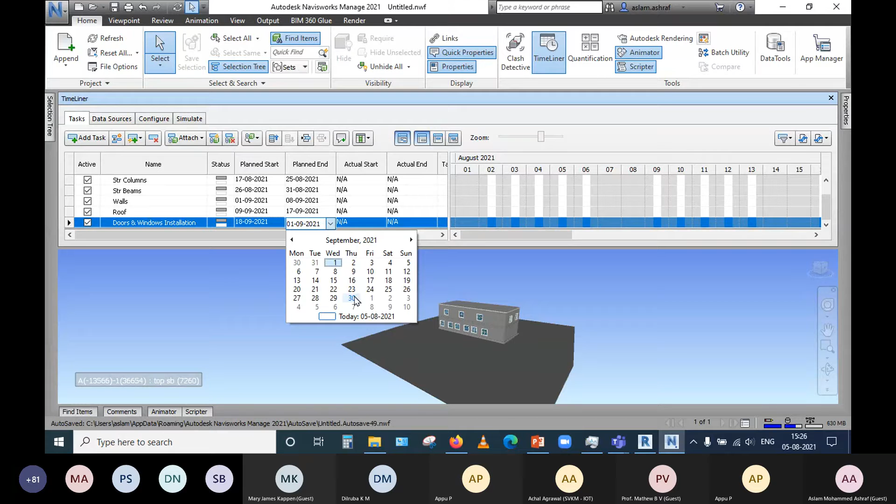Okay, then the other rows should be after. If you want to reorganize the tasks, you can use the move up and down option here. And the important thing is that you have to link these tasks with the real BIM model here. So how will you connect that? That is the important thing.

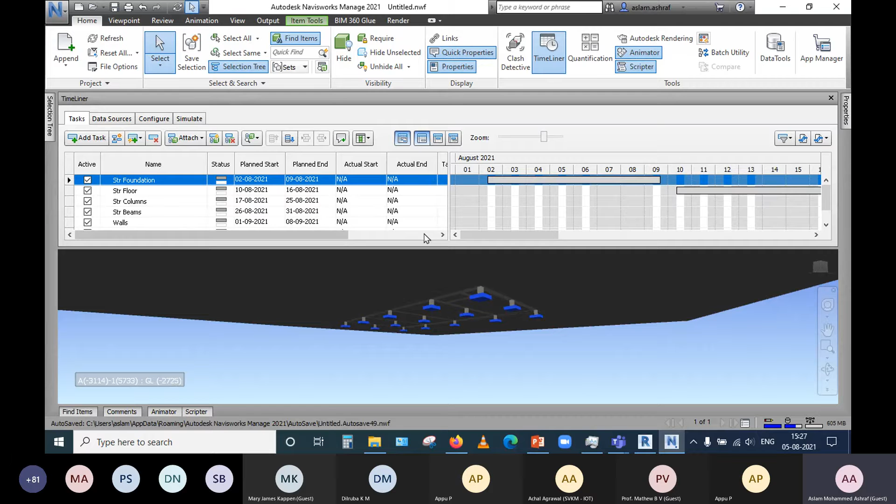So first of all, structural foundation. I need to connect all the structural foundation elements with this task. So I will select one of the structural foundations from here, and you can select same type. All of the structural foundations will be selected, and you will attach them to this corresponding task. So how to attach? Right click here, then click on Attach Current Selection. So all these selected elements will be added to this specific task.

Similarly, floor. Select the floor from the geometry. You can select it either from here or from this selection tree, if you want. So here I will be selecting from the model itself, attaching. Then similarly columns. I'll select one of the columns, then click on Select Same Type. All the columns will be selected. You can see the blue color here.

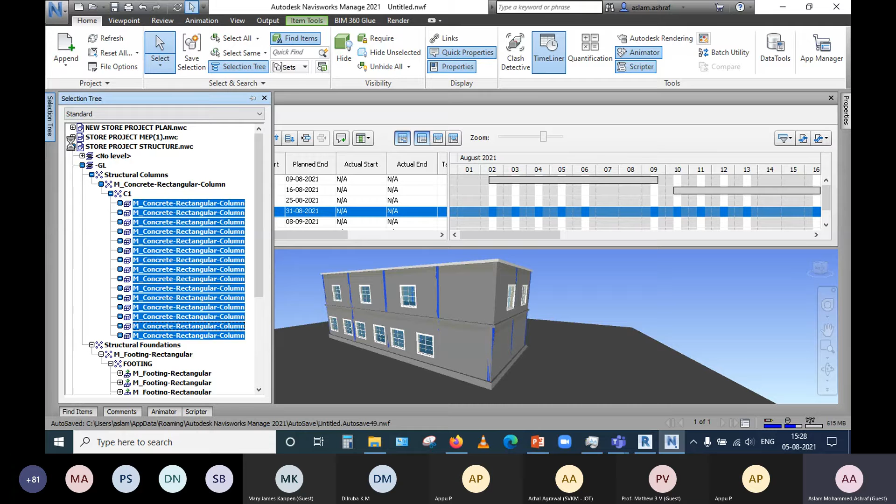Similarly, beams. Beams are called structural framing, the category Structural Framing. So once you are familiar with software like Revit, it will be easier to identify. Otherwise, it will sometimes be confusing. So structural framing means beams, and you can attach this to that specific task.

Similarly, walls. I select one wall, then Select Same Type. So all the walls will be selected. You can check it here. All the walls are being selected.

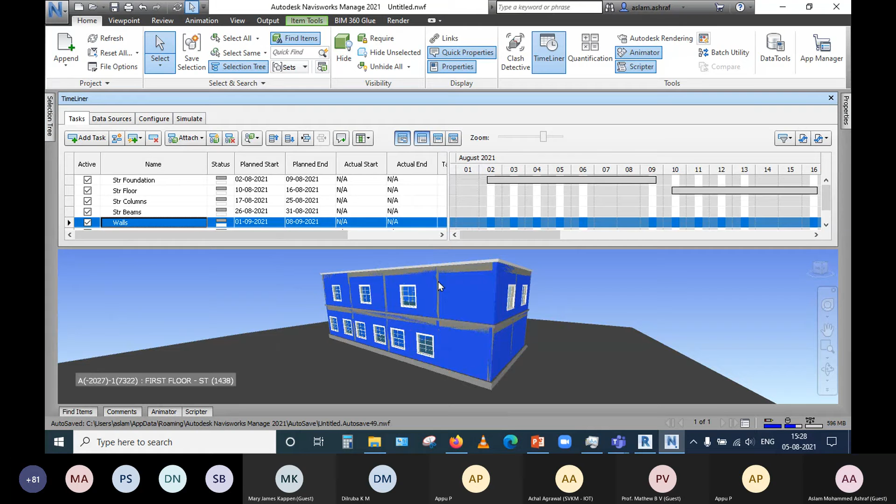Then you have to attach it to the wall activity. Similarly, the roof. Doors and windows. So all the doors and windows from this model, the architecture model, will be connected here. So you can separate the activities if you want to. How you are going to plan, in that way you can connect.

Actually, there are many other elements like ceilings that I have not considered here. Actually, it should be there. So all the doors and windows are being added. That is also connected. Then finally, if you want to have the landscaping, you can add another task, landscaping.

Sometimes the task can be simultaneously started. All these tasks I have added like start-finish format. After finishing of one task, another will start. Sometimes the task can start simultaneously, like for example,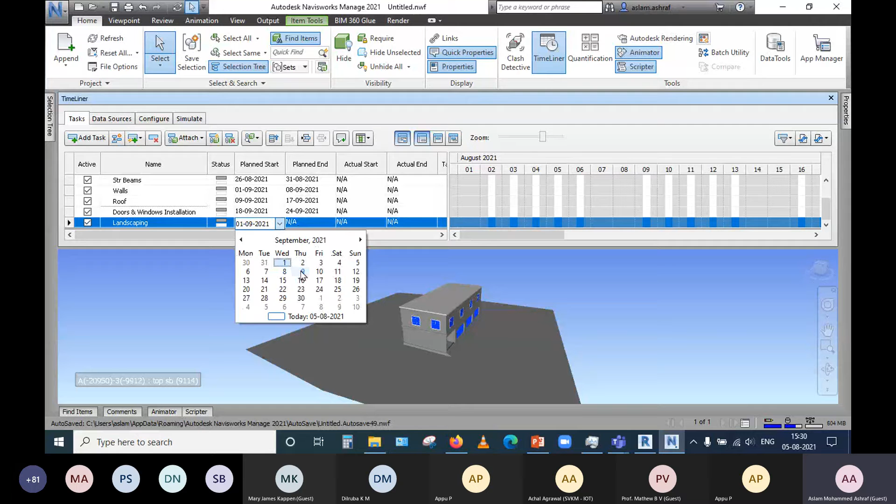I'm adding this landscaping from 9th of September itself, because it is starting from the same date of construction of the roof. So I will set it as 9th of September, and it will be ending like 23rd of September. So all the landscaping elements.

So you can confirm by clicking on these selections. It will highlight the connected geometries. So if there is any error, you can replace it. Okay, now you can run the simulation. Before that, you need to set whether it is construct or demolish or temporary construction. All these are new construction, so I will set it as new construction.

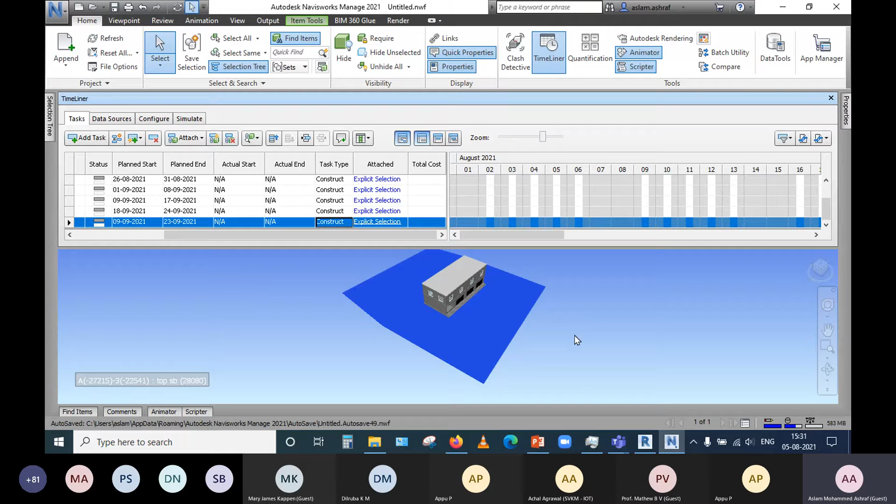So finally, you can run the TimeLiner or 4D simulation. So why it is called 4D? Because the fourth dimension, that is the schedule or the project planning data, is being linked with the 3D model. So that's why it is called a 4D simulation.

And you can go to the simulate tab here. Then you can go to settings and make sure the time and date is correct, the starting and ending date are correct or not. Then you can set it based on days, hours, minutes, etc. So I'll be setting it based on days, 1 day interval. And you can see that it will be starting from 2nd of August.

So it will be around 53 or 54 days duration. So I'm setting the seconds as 54 seconds. So 1 second will be equivalent to 1 day in the simulation. Then it will be based on planned days, not actual days. That is, we are providing planned start and planned end here.

Then we can start and the simulation will start. You can see that starting day here, 2nd of August, 9 a.m., day 1, week 1. And if you click on play, the schedule will start running. And the construction, you can see the progress happening here. The foundation, then the floors, the columns. So how you are providing the data, it will be simulated accordingly.

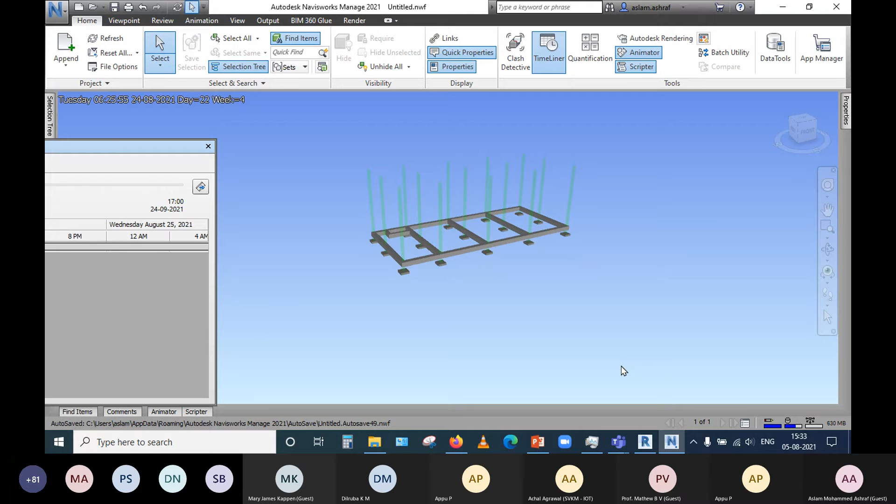So now, if you pause this simulation here, you can see that it is day 33, 5th week, that is 3rd of September. And if you are bringing the cost data from Primavera or MS Project, the cost can also be highlighted here, the budgeted cost. So you can understand, during the construction of the columns and beams, how much of the cost will be consumed, and you can plan the budget accordingly from the simulation itself.

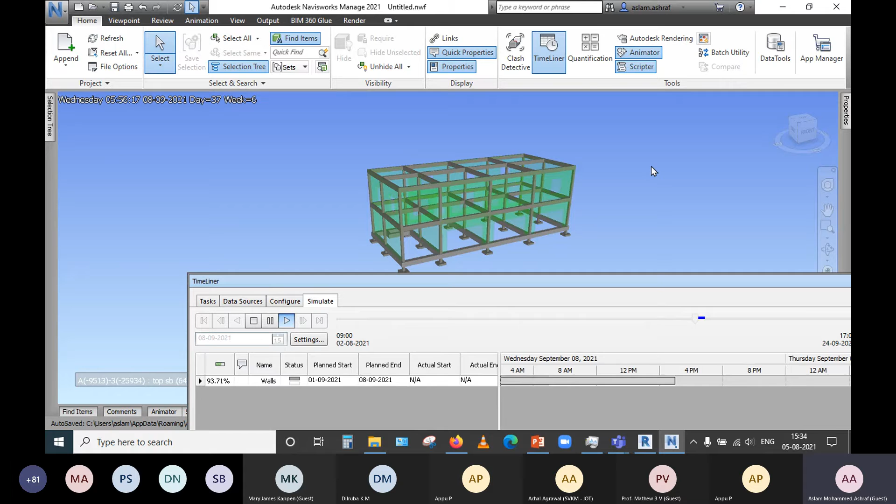Now it is very much more interactive than going to look at a Gantt chart or some network diagram. It is very easy to understand from the model itself. And there are many sophisticated tools to create more interactive animations. So we can create a simulation like this.

So this is called a 4D simulation, and you can even add the 5th dimension, that is the cost of the project, into here, like we did here in day, week, etc. If you are bringing the data from Primavera or MS Project, that can also be implemented. So that is called a 5D simulation.

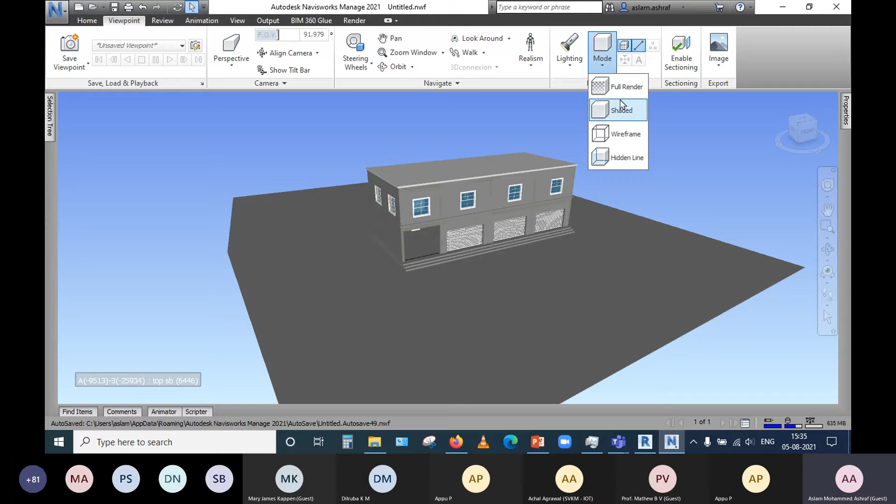And clash detection in Navisworks we have already seen, and we can create many useful animations, like you can create walkthroughs, how the building will look. You can use tools like walk here to navigate into this model, and you can have a 360-degree view of the rooms.

And you can look up and look down, and you can check whether the modeling is correct or not. Otherwise, you can make changes. And it should be noted that Navisworks is used for navigation and simulation only. If you want to make a change, you should go to Revit and make the change. That is the process. So even above the ceiling, you can navigate and check the MEP connections and whether it is okay or not.

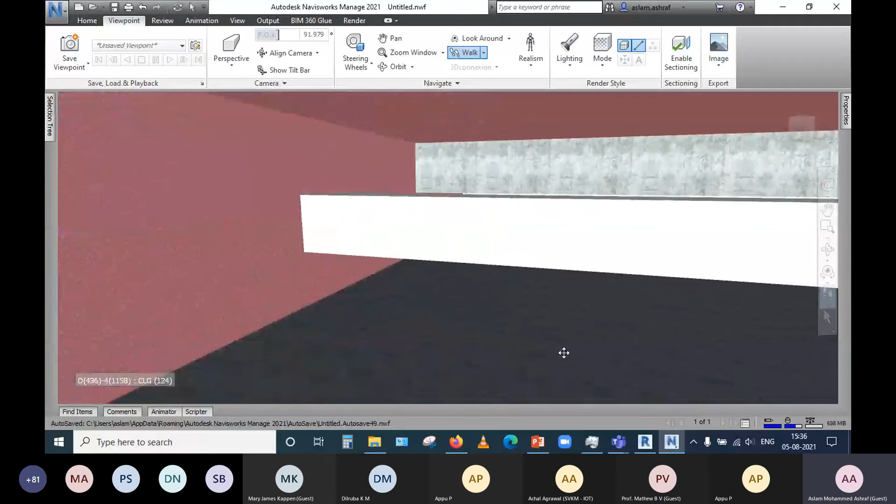And you can see that there are some clashes here. So if it is not cleared, it will be manually identifiable, and you can delete them. You can remove them in Revit itself.

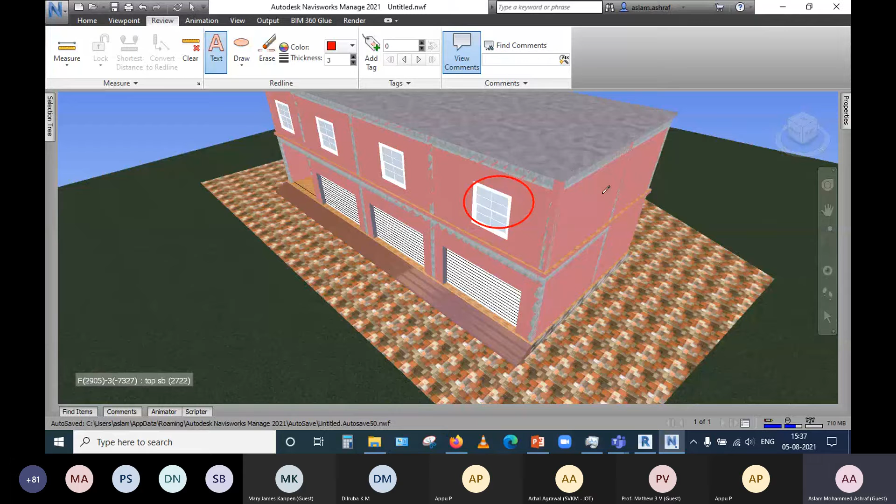And you can create project review markups, revision clouds, etc. in here itself. While you are navigating, you can simply use tools like revision clouds and you can simply mark them up. For example, if you want to add some text like window by 10 centimeter to height or something like that.

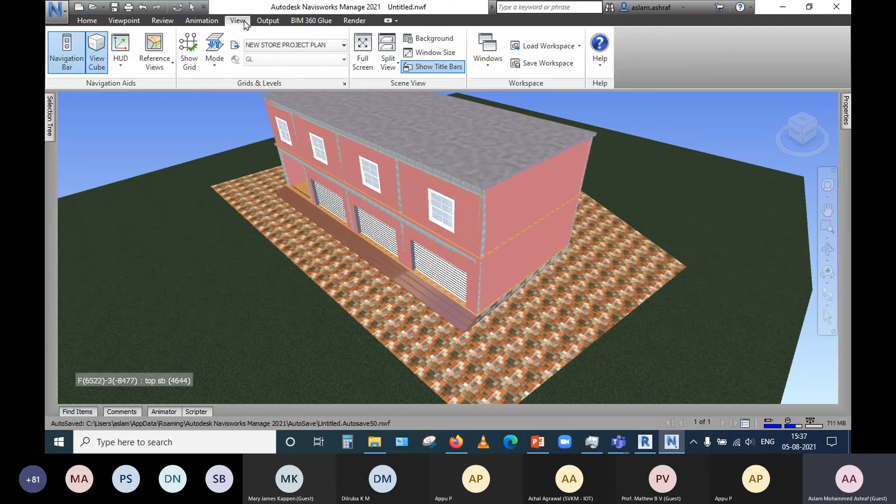You can add the comments like this, and it can be saved like a screenshot. You can save it here, save viewpoint. So if you are navigating away from this, you can go to the saved viewpoint tab here. That will show you the comment you have added. So this can be sent to your team members and they can easily identify rather than looking into the AutoCAD.

So these are some benefits of BIM softwares like Navisworks. Then there are many other workflows like... so we have explained what is a 4D simulation. A 4D simulation combines spatial coordination with a construction plan. And we are using Timeliner for creating this specific task. So you can have real project plan data from Primavera or MS Project created by the planning engineer, and you can create your own 4D simulation.

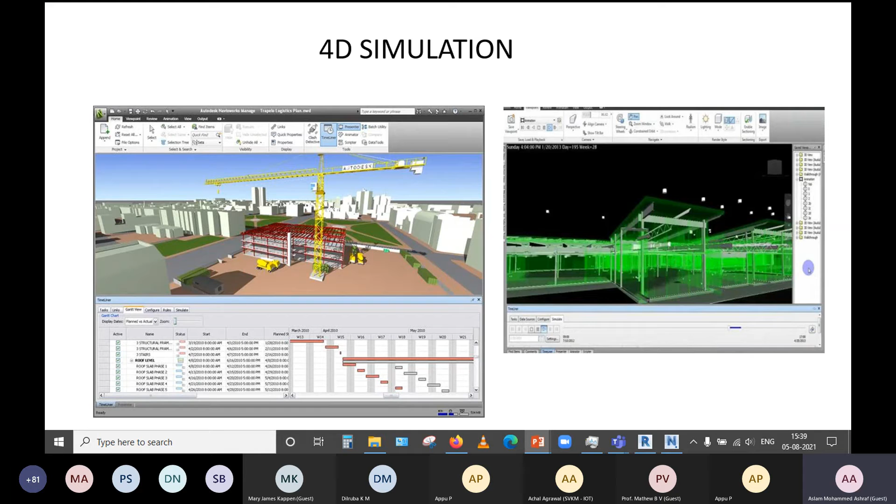And finally, the cloud-based platform that is called BIM 360. So we have seen how we can create BIM models using BIM authoring tools like Revit, then how to place different elements, how to add the parameters, take the estimate. Then we will see how to do the coordination using Navisworks, creating 4D simulation from Navisworks. Then in order to have complete control over the BIM workflow, that is level 3 BIM or the open BIM standard, we need BIM 360 or any other similar tool. That is a cloud-based platform.

There should be a cloud-based platform like, for example, Google Drive or OneDrive. We can store any data in a folder system in these cloud platforms. So you can upload your projects, your drawings, your related files, your 3D geometries, the photos from the site, the reality capture you have got from the drones. Everything can be brought into this BIM 360 platform, and it can be shared with the different team members

with different access permissions. For example, some folders can be accessed by the senior members only. Some will be accessed by the architectural team only. The MEP engineers will have their confidential data. So the access can be managed by the manager, the administrator. And the important thing is that this can accelerate project delivery and reduce risk for companies by enabling the office to easily coordinate and connect while empowering the field to anticipate and act. There will be proper coordination between the site and design office.

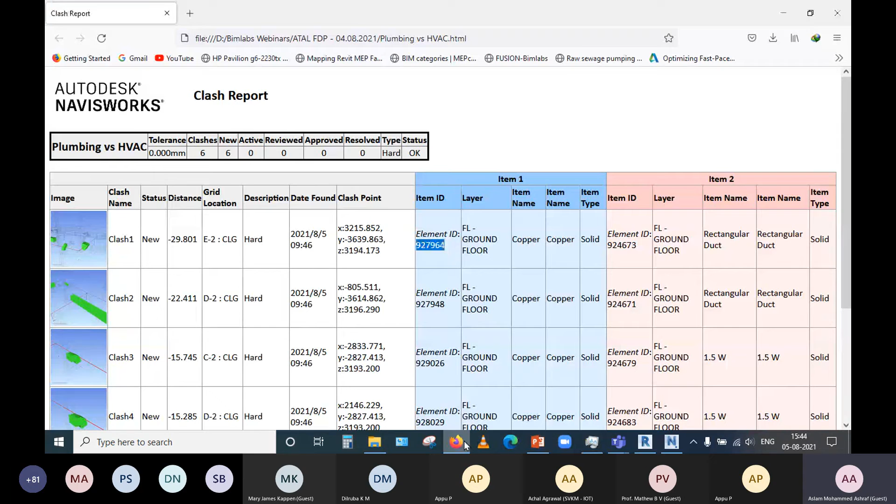it into this platform. So that is the importance of BIM 360. It is a cloud-based platform, and it should be purchased; it cannot be used without purchasing. After purchasing, the admin can add any number of team members into the project. You can find BIM 360 by simply searching for it on the web and get more details there.

So there are different workflows there. There are different products, Docs, Build, Coordinate, and each module has its own function. Docs is a kind of document management drive. Design is for work sharing and design collaboration. Then there is a module for facilities management.

You can save your model into the cloud and set details like operation and maintenance schedule, warranty papers, etc. into the model, and that can be accessed by different stakeholders. There are many options: site execution, meeting minutes preparation, project management. Even the clash detection module is there, called Coordinate inside BIM 360. Without any software, you can do clash detection also.

So these are the things related to BIM 360, and this is all about building information modeling and the subsequent digitization of the construction industry. BIM is the key to digitization of the construction industry. Or you can say that BIM is equivalent to digital construction in a major sense.